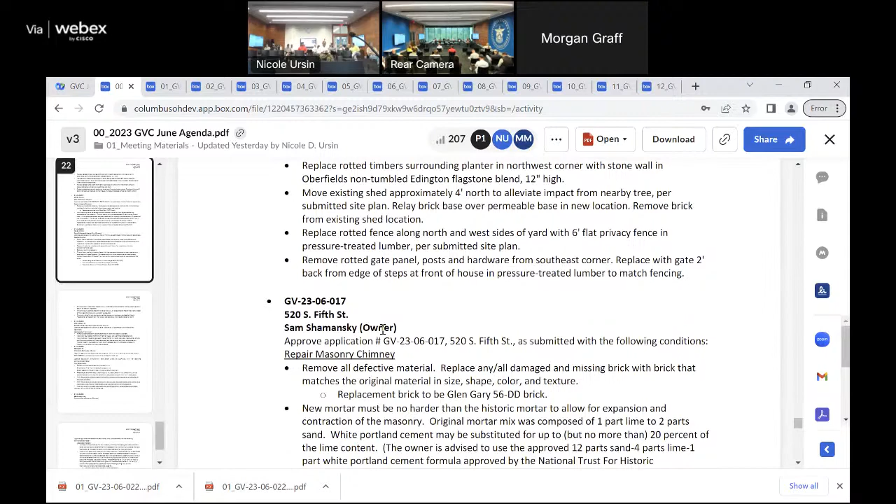It's GV 23-06003, 241 Alexander Alley. Thank you.

Mr. Chairman, if there are no other ones, I move to ratify the staff approvals. Second. Any questions on the motion? All those in favor? Aye. Against? Ayes have it, the motion passes.

Moving on to the approval of minutes from the previous meeting from May 3rd, 2023. Mr. Chairman, I move to approve the minutes. Second. Any questions on the motion? All those in favor? Aye. Against? Ayes have it, the motion passes.

Moving on to the applications for certificates of appropriateness. Item 1, GV-23-06-022, 311 Columbus Street.

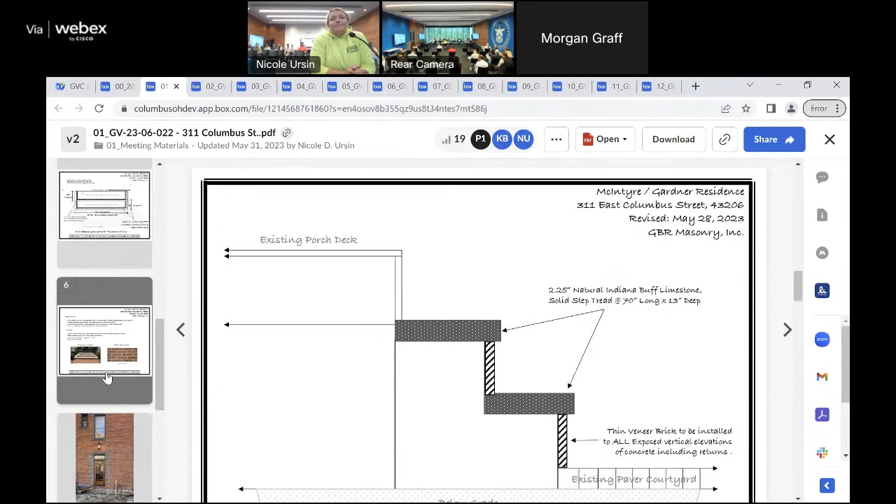So this is not typical construction for the village. It's either wood or limestone. Really, the case is all brick. This is a combination of a limestone tread, which is not full depth, it's 2 inches, 2 1/4 inches. And the fascia or the risers is all done in brick inset.

It's also in the rear yard. Yeah, I was gonna ask, is it rear? No, it's front yard. That's what I thought. The concrete's been in since the 50s. It's not level, it's not square, it's unsightly.

So my suggestion would be, since these are not original historic materials, you've got to replace them in kind. Replace it with appropriate wood construction, or appropriate limestone construction, with appropriate tread and riser ratio for code.

My company is in the habit of tearing out steps, excavating for steps, as you can see in other properties, and building them from full masonry. But I don't understand why I need to completely remove solid concrete. I'm just saying what you're proposing is a limestone tread with a riser, which is not German Village architecture.

There's an example of one I've done in the village, and I have multiple examples. Probably in the backyard. On Mohawk Street, 883 Mohawk is on there somewhere — sandstone risers, brick steps, backyard. That one's front yard. That one is the backyard.

I don't mean to get into it, but I have lots of photographs of the historic village. I'm just expressing my opinion about this application. There are multiple scenarios in the village of what I believe about this, and I'm saying there's lots of them.

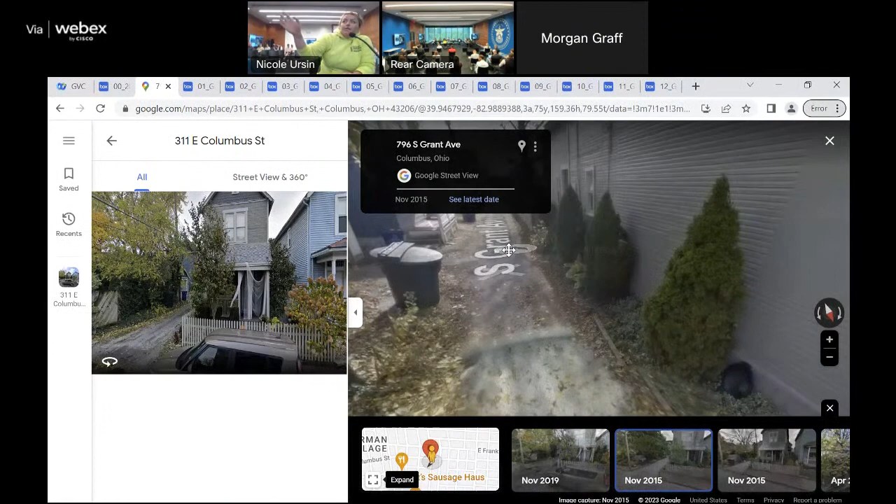But what if you just read number 4: if porch bases, steps, or stoops connect to a stone foundation, you need to maintain the stone foundation's color. As I mentioned, there isn't one, and it doesn't need a roof either. But there is a brick paver walkway, brick pavers in the courtyard, which are concrete. They plan to change to real brick in the next phase of this project.

So the running riser brick falls in suit with the replacement of those pavers in the future. It doesn't agree with the guideline though, that says the riser and the tread should be the same color. So you've got a dark brick. If you could reread number 5, I believe it said the brick shouldn't be a different color than the stone. 'Avoid brick as material for porch bases, steps, or stoops, because brick used in this way breaks the visual continuity of light colored stone foundation. Instead, use light colored stone or construct these features out of concrete with a color similar to that of the local stone.'

So there is no stone to match, so there's no reason that brick shouldn't be available. Well, that could also imply that the concrete is a substitute for stone, and having brick applied to the concrete then kind of wrecks the illusion of it being a substitute.

I remember approving at least one, if not two, of these previously. Have those been approved? That was my next question. Yeah, there was one on Sycamore that we didn't approve, for the big set, because they were doing the same thing. So pick your choice.

And I don't find it particularly actionable, I'm just trying to find guidance. Again, the reason for the brick risers is to match the brick courtyard, which will match the brick sidewalk, so in that regard, everything does flow and match. Except you've got a wood porch. Does the porch seem to be original? Yes.

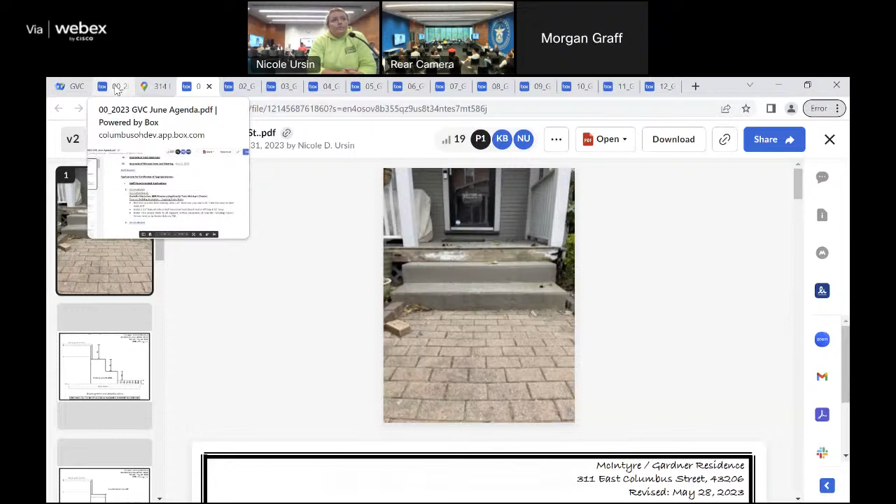I feel like the brick riser comes from nowhere if it were on a brick house. But you have a wood frame house, and I can see adding limestone steps if they're all limestone. I would rather see the riser and the tread be the same material. They said the concrete—I could deal better with it, it's just the concrete. By the time they cut that away, I think... if you scroll down, there's an exact replica of what will happen after this work is done, taking a little bit off the bottom step and a little bit more off the top step.

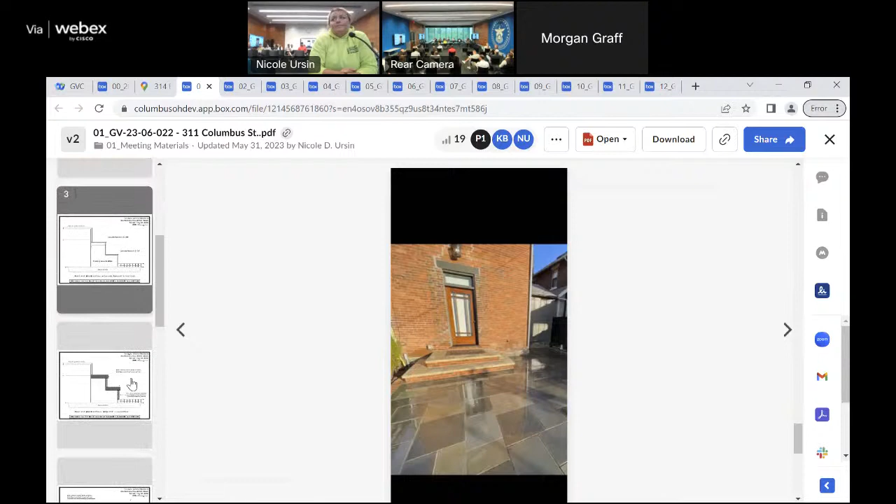I get all that, but the thing that strikes me as odd is the fact that there's brick on the riser, but no brick on the home. I get that you're going to put a brick sidewalk in, but still, if they choose to wrap that brick porch in block and put more brick there, that's up to them. Right now, this is the first step of making the front of their house look more appealing. To me, the only thing that's weird is the brick riser and then wood top steps. It's a lot of materials there.

We can vote and see where it falls, or we can take it back to the homeowner and decide what they want to do. It's up to you to ask us which.

This has always been their goal. I remodeled their kitchen, went through all the facets last year, and taking that remodel and moving it into the front of the house was always their anticipation. This has been going on for 4 months now, and with the cancellation of the last meeting, thank goodness I haven't ordered materials for this project that's been approved by my clients for the last 5 months. It doesn't make sense to me that a goal they've always had since they bought this property can be shut down when properties on their street are under construction without permits.

It's making me a little crazy to go through this 4-step process when a pool next door gets approved in the first go through staff approval, on a house under complete tear-out construction. There's never been a pool that's staff approved, that's not an element we staff. We're going on 4 months now. We do not staff approve pools, but we do staff approve steps if it's in-kind, or if it's the original fabric that was in place.

But if it's restoration, alteration, and change, I understand that's something different. It is an improvement in my opinion, and continuity of the materials will flow after the courtyard is done, after the curbs and railing are done, which still have to come in front of this commission. I already have the application submitted for that next step.

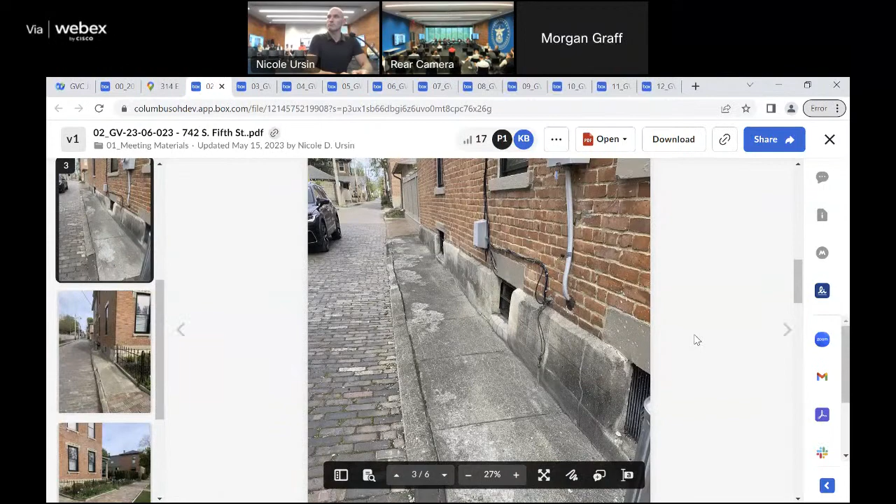Staff analysis: at the June business meeting, the commission requested information on where the applicant will source the brick, and the applicant responded that the bricks were salvaged from a home in Marietta, Ohio. The bricks have been salvaged and are on site at 742 South Fifth Street. Staff recommendation: staff recommends approval with any and all clarifications to be submitted to HPO staff for review and approval prior to the issuance of a certificate. The basis for that recommendation is 311613 standards for site improvements A, and the German Village guidelines for walks, sidewalks, driveways, patios, and parking lots 1.

Anything else to add? All right, questions, comments from the commission? Just a comment that I think these are actually Haydenville bricks, not Nelsonville bricks. I think the bullseyes were Haydenville. They're really cool, the technology was patented in Ohio, and these are all over the world. They're really cool, they're both Nelsonville, and they're all over the neighborhood too. Yeah, I made a little patio with this.

That's one question for the commission. Putting in, typically we use red brick pavers - this is more decorative, historic. That may not have been the original location where they're proposing it. If this is approved, is the case for approval the fact that we're matching elsewhere on the property, as opposed to putting in new, or is this something we approve across the board on any application?

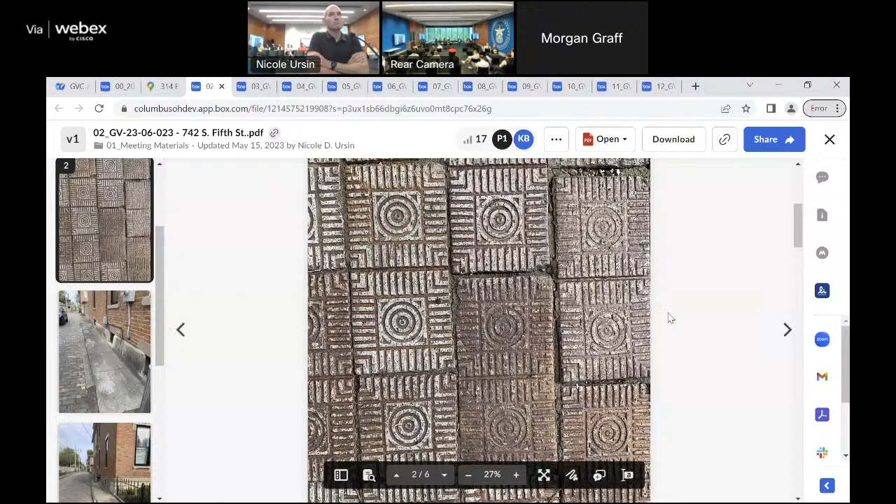I don't know about any application. I think it's applicable here because it's a continuation of what's already in front, and also the house across the street - there's two of those, and they were likely time appropriate as well. I just want to make sure we have justification, that's all.

Mr. Chairman, on item 2, GV 23-06-023, 742 South Fifth Street, I move to approve as submitted. Second. Any questions on the motion? All those in favor? Aye. Against? Ayes have it, the motion passes. Thank you very much.

Moving ahead to item number 3, GV-23-06-024, 243 East Livingston. Once you're settled, please raise your right hand. Do you swear to tell the truth, the whole truth, nothing but the truth? I do. Please state your name for the record.

Andrew Rhoda. This is a request for action of the variance recommendation, for 3356.03C4 permitted uses, to allow for residential use. Staff analysis: I added photos this morning so they're not on your Kindles, and I apologize for that - they're on the screen now. There was no COA on file for converting the structure from residential to commercial use, and the building is currently used as a commercial property.

At the June business meeting, the commission asked if a parking variance would be needed and if there were any other variances needed for the property. The applicant provided that there were 2 off-street parking spaces behind the building and no other variances would be needed. Staff recommends the commission recommend the application as submitted. The basis for staff recommendation is 311613 standards for site improvement A, and the German Village guidelines for zoning variances, page 139. Anything else to add?

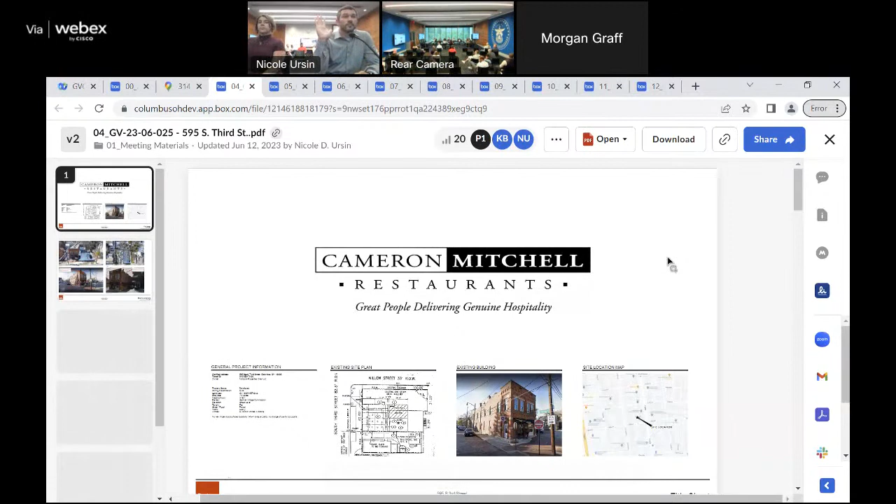Thank you. All right, moving ahead to item number 4, GV-23-06-025, 595 South Third Street. Once you're both settled, will you please raise your right hands. Do you swear to tell the truth, the whole truth, nothing but the truth? I do. Okay, please state your names. Valentine Catapano. Randy Roberti. Cameron Mitchell. Thank you, this is a request for action.

The proposed work description is an exterior building alteration for changes to approved design and light fixtures, to remove hanging lights from the tree. The lights were approved as GB 2210-10-26 because the new tree was approved as GV 23-04-017 cannot support proposed light fixtures. Also to relamp the existing light fixtures on the building and rewire existing exposed exterior conduit on the building interior through masonry joints, and the landscaping is revisions to planting beds on the patio and entry for submitted landscaping plan.

Staff analysis is that a tree was approved for removal following guidance from HPO as GV 23-04-008, and a new tree was approved as the replacement tree for GV 23-04-017. With the approval of GV 23-04-017, the applicant confirmed that no changes to design would occur. The applicant now shows removal of hanging lights due to the replacement tree. At the June business meeting, the commission asked the applicant what the light spread would be from the light fixtures being rewired and requested close-up photos of the light fixtures. The applicant provided new material showing photos of the lights and the proposed light spread.

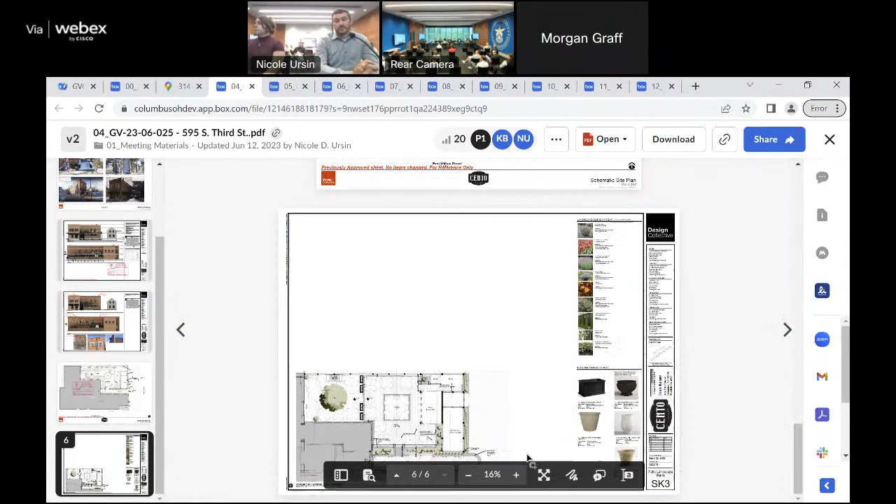Staff recommends approval with any and all clarifications to be submitted to HPO staff for review and approval prior to the issuance of the certificate, with the condition that the applicant confirms no new light fixtures are proposed for the building. The basis for the staff recommendation is 311613, standards for site improvements A, and the German Village Guidelines, exterior considerations for site lighting, street furniture, pools, fountains, and gazebos, 1, 2, and 3. Anything else to add? No. Questions, comments from the commission?

Got questions about the two light fixtures on the front of the building, east side, the existing ones. I cannot remember those ever being illuminated. Yeah, they no longer function. Yeah, so I can't remember what the pattern is, but you're doing 25 degrees.

Strictly aesthetics with you guys on this? Yeah, 100%. That's my only concern. The goal is just to accent the facade. That's what I figured, but I think a 25-degree spread's gonna hit the curb and go out. So yeah, exactly, if you can knock it down and wash the front of the building with it, that would be what I would recommend.

Any other questions or comments? But just for clarity, we're willing to amend the application as suggested. So what, just angle it down a little bit more? Head towards the building, it should... however, clarify how we'll put on the record that it's washing the building at the top of the awnings and minimizing any impact on the sidewalk. Goal is to wash the building, not to wash the sidewalk.

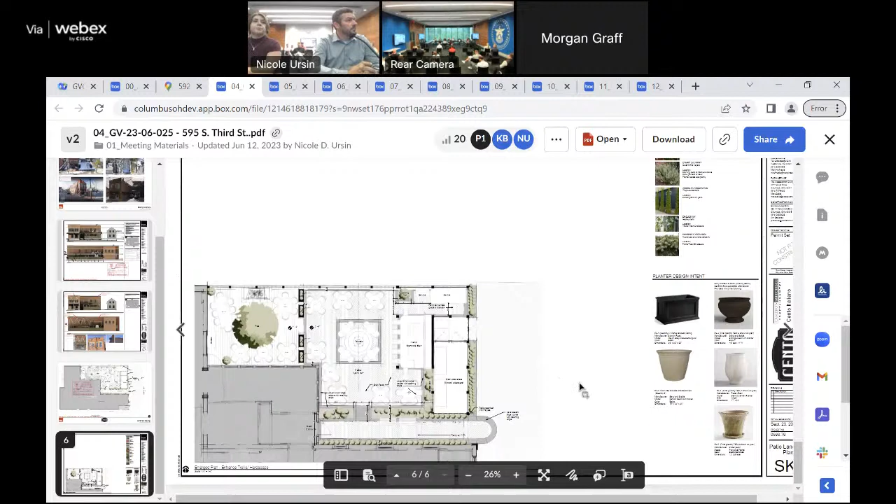Same side there, the entry alley, if you will. Thank you, yeah, same location as previous. We just made a very minor tweak so they won't sit on the curb, they'll sit on the pavers — is that right, Eric? Correct, sunk into the pavers.

Good. Is there a motion? Mr. Chairman, on item 04, GV 2306-25, 595 South Third Street: move to approve as amended by the applicant, that the light fixtures on the east elevation will be strictly wall wash at the top of the awnings by cranking down and shrouding the existing fixtures.

Is there a second? Second. Any question on the motion? All those in favor? Against? Ayes have it, motion passes. Thank you. Thank you. Thank you.

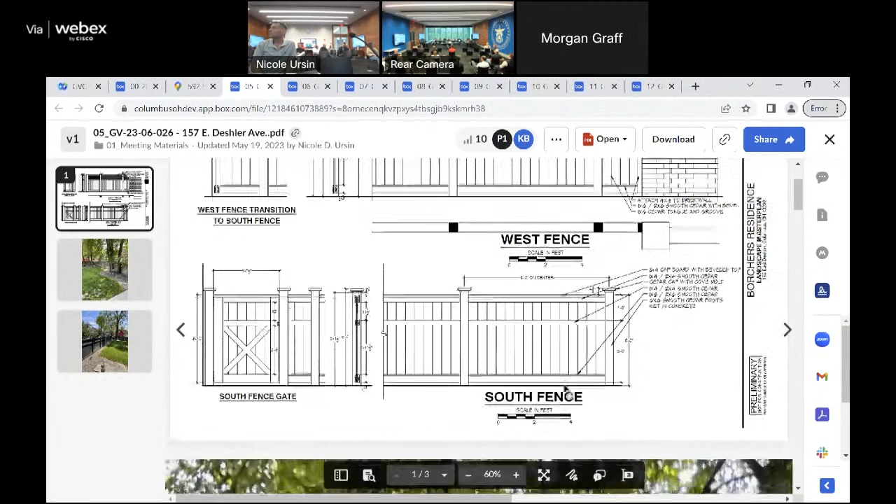Mr. Chairman, on item 05 GV 23-06-026, 157 East Deshler Avenue, I move to approve as submitted with the amendment that the fence will be painted and color samples, whatever, will be submitted to HPO.

Second. Any questions on the motion? All those in favor? Against? Ayes have it, the motion passes. Thank you. Thank you.

Moving on to item number 6, GV-23-06-027, 835 City Park.

If you please raise your right hand. Do you swear to tell the truth, the whole truth, and nothing but the truth? Yes. Please state your name for the record. Jan Park. Thank you. This is a request for action.

It's for landscaping to remove a tree, an existing dying spruce tree from the backyard, and to plant a new slender Hinoki cypress tree on the north side of the property.

The staff analysis is at the June business meeting. The commission asked what type of spruce would be planted, and for the applicant to provide a landscape sketch showing the existing and proposed tree locations.

The commission asked how the tree will impact the house. The applicant responded that they would rather plant a tree on the north side of the property rather than the south, as the south side is very close to the neighbor's house.

The area is identified in a photo in the materials packet. The location is away from the north neighbor's house, and the applicant provided they would prefer to plant a slender Hinoki cypress tree rather than a spruce tree. It is a narrow, upright growing evergreen. It will grow in a pyramidal shape with open branches for a textured look.

It grows to a mature height of around 8 to 12 feet and a width of 4 to 5 feet.

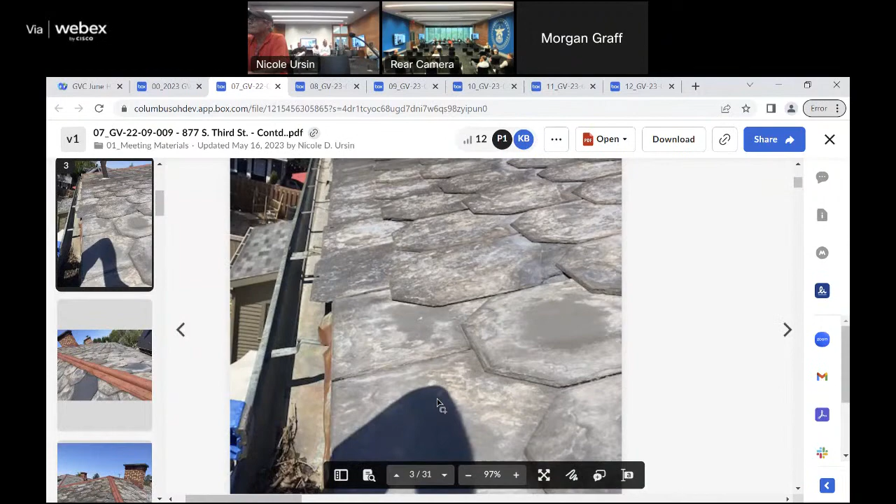The proposed work description is for exterior alterations proposing to replace the existing ribbon slate roof with an approved shingle, the GAF slate line English gray, to install metal ridge roll in either Tinner's red or gray. The roof has had past repairs as stated by the applicant. The slate assessment has been provided, and a second assessment has now been provided this year to be placed on this agenda.

The following is from the approved September 2022 GVC hearing minutes. Commissioner comments: Commissioner Thiel stated that the report submitted indicates that the underlayment is the cause of the leaking roof, but stated that the underlayment would not be justification for a full slate removal since it is an existing condition. Commissioners asked the applicant to clarify if the condition assessment was from a separate company, and the applicant verified that he is not a part of the company that did the assessment.

Commissioners agreed that they did not have enough documentation and would need additional documentation to finalize their review, to see additional evidence of where the water is coming from. Commissioner Harkey asked the applicant if there was access to the attic, and the applicant stated there was a panel in the ceiling to access it. Commissioner Harkey recommended the applicant explore the attic to see if there's evidence of damage or where the water may be coming through, and to know how it relates to the areas.

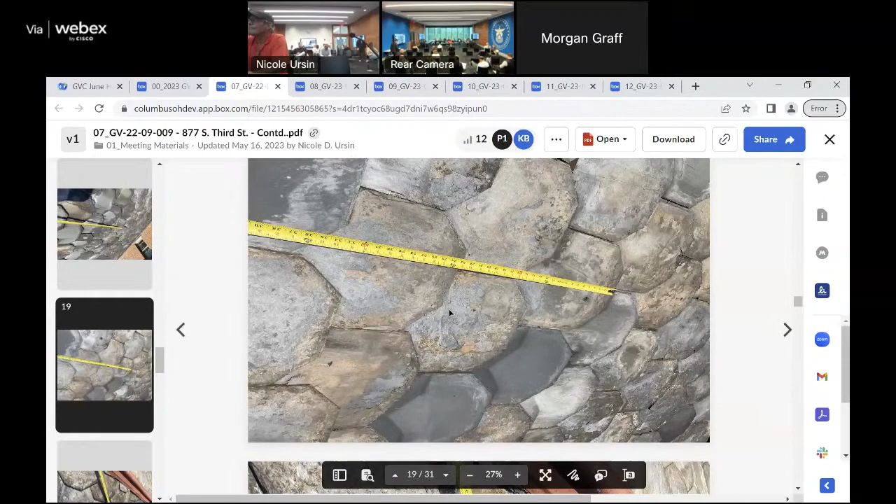Commissioners asked to clarify the asphalt shingle selection. The applicant responded stating that they would be selecting GAF slate line English gray slate in lieu of the antique slate, and that they will be choosing the English gray slate if approved. Commissioner Durst asked if the chimney flashing had been updated and if the flashing was embedded in the mortar. The applicant stated that yes, the flashing had been updated and was installed via mortar joints, and the chimney has been sealed and maintained.

Commissioners recommended obtaining an additional assessment from another slate company.

At the June 2023 business meeting, the commission asked if the underlayment would be installed and if that would impact the profile of the roof, and emphasized that a metal roof ridge roll would be required. The applicant responded saying they intended to replace ice guard on all eaves and synthetic felt on the rest of the roof, and said that it would not impact the profile of the roof. They have always intended to put back metal ridge roll on the opposite ridges.

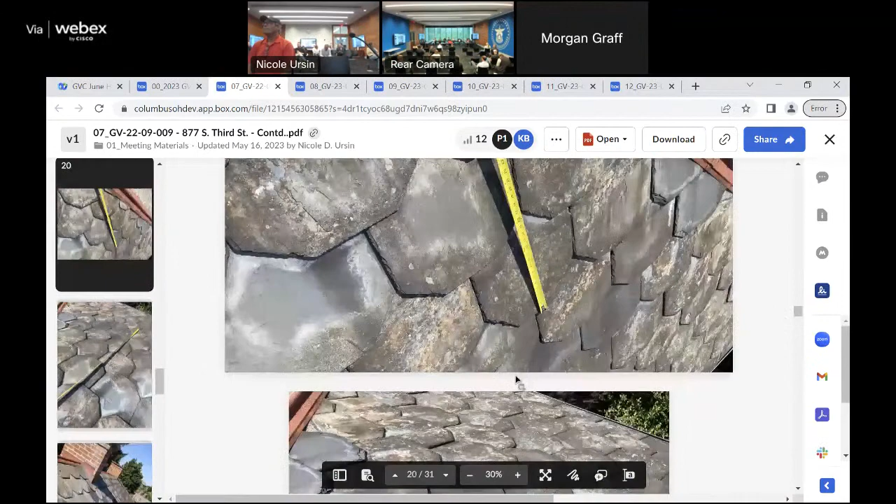The staff recommendation is that the commission offer feedback and continue the application to further evaluate the condition of the existing slate. The basis for the recommendation is 3116.11, standards for alteration 6.5 and 11, and the German Village guidelines, the 2005 amendments for slate roof replacements, page 175.

Anything else to add? No, not at this time. Questions, comments from the commission?

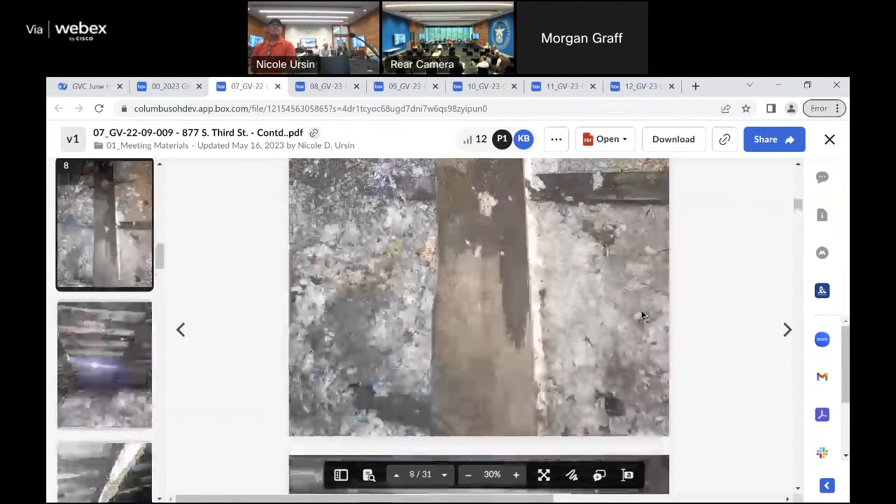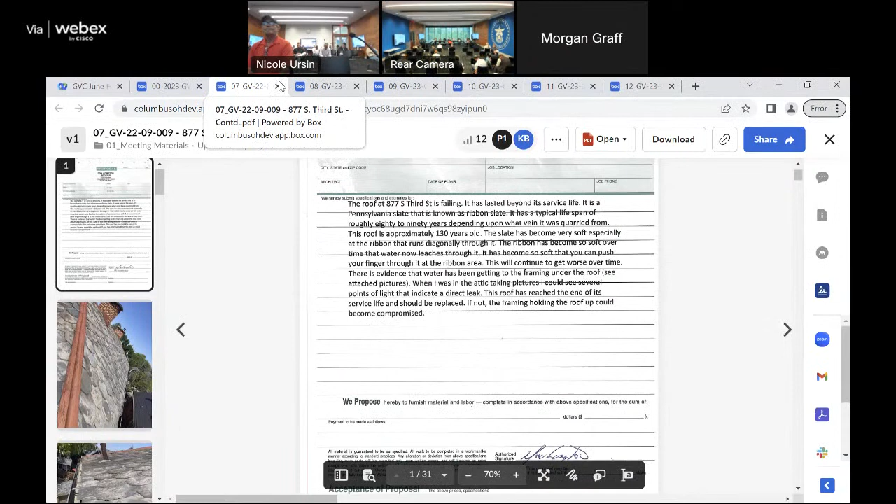Good, there's no questions or comments, is there a motion? We're on a roll, 07 GV 2209009, 877 South Third Street. I move to approve the certificate. Second. Any questions on the motion? All those in favor? Aye. Against? Ayes have it, motion passes. Thank you. Thank you.

Moving on to item number 8, GV-23-05-028, which is 30 Columbus Street, 40 Columbus Street, and 762 Pearl Street.

Once you're all settled, if you would raise your right hand. You swear to tell the truth, the whole truth, nothing but the truth? Yes. Please state your name for the record. Kevin Parzak, Gunzelman Architecture + Interiors. Thank you very much.

This is a request for action. The proposed work description includes a lot combination and exterior building alteration. The lot combination is to combine 3 adjacent parcels, 30 and 40 Columbus and 762 Pearl Street, zoned R2F residential district. The proposed use is 3 residential units. There's also a variance recommendation involved: 3332.14 R2F residential district, permit 1 building with 3 dwelling units on the parcel.

3332.18, basis of computing area, to increase the lot coverage from 50 to 58%. 3332.19, fronting, to permit 3 dwelling units on 1 parcel without street frontage. 3332.26, minimum side yard required, to reduce the north side yard from 5 feet to 1 foot and the east side yard from 5 feet to 1 foot. And 3332.27, rear yard, to reduce the rear yard from 25% of the lot area behind each building to an existing rear yard of 0% as depicted on the site plan.

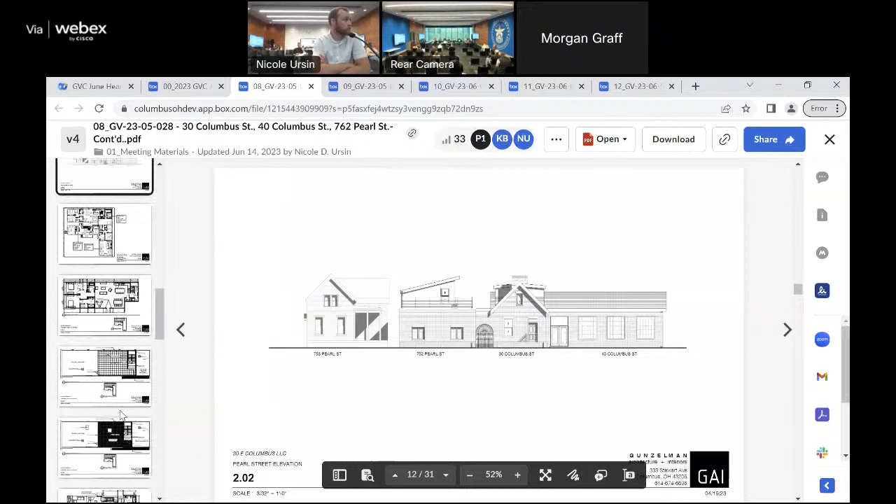For 40 Columbus, they'll repair and refinish existing metal windows, and install a new door on the west elevation. The door to be an aluminum clad wood double door with transom above to match the adjacent masonry openings, and the openings were bricked-in windows.

And on 762 Pearl Street, to install a new stair access to a new rooftop deck. Install a 6-foot tall privacy wall around the roof deck patio on the north elevation of the rooftop patio. Patio material to be a spire, interlocking paver, pedestrian grade. Install a 3-foot 6-inch railing with top rail above patio pavers on the north and west sides of the rooftop patio. Windows from the approved list and full light aluminum clad wood door to be installed at the rooftop access penthouse. The shingles will be from the approved shingle list, and the siding to be horizontal fiber cement siding.

Also at 762 Pearl Street, install new windows on each side of the existing door on the south facade, and the windows to be from the approved window list.

Staff analysis: the following is taken from the now approved May 3rd, 2023 GVC minutes. Commissioner comments: the commission commented that because staff has found the windows to be in repairable condition, the commission would encourage repairing the windows and might not support replacement. More documentation would be required for replacement to be considered.

The commissioners questioned the decision for a door rather than a window on 40 East Columbus Street and discussed the evidence of an opening at that location. A window seems to be a more appropriate choice for that opening. There is evidence of a fourth opening having existed or having been planned. The commission suggested bringing back the original masonry opening, and a window or door that matches the size of the masonry opening would be appropriate for that location.

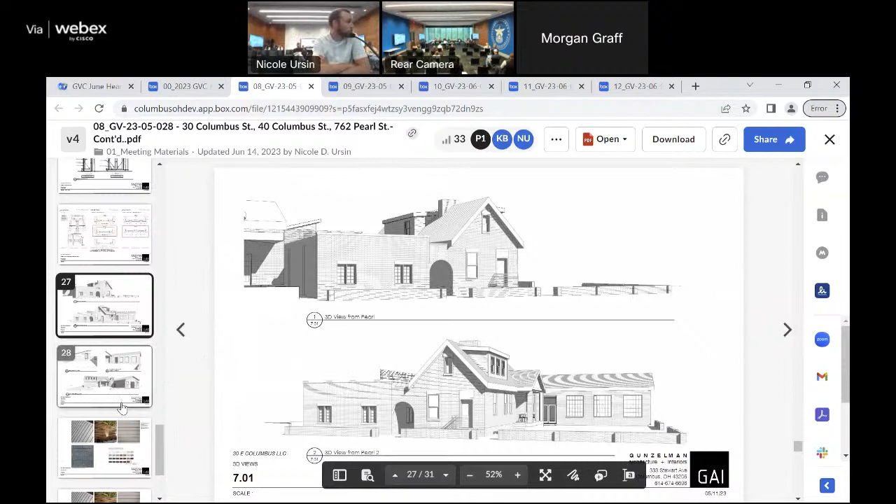Staff has provided Sanborn maps showing the location in 1891, 1921, and 1961. The buildings at 30 East and 40 East Columbus appear to have been built prior to 1921, and the building at 762 Pearl Street was constructed prior to 1961.

At the June business meeting, the commission asked for manufacturer information for the fiber cement siding, asked for the height of the fence at the south and southeast corner, and told the applicant to be prepared to discuss the style of door for the proposed double door. The applicant provided some siding information and a new sketch of the Pearl Street roof that states the height of the walls and fence on all sides.

The staff recommendation is approval, with any and all clarifications to be submitted to HPO staff for review and approval prior to the issuance of certificate. The basis for staff recommendation is 3116.11 standards for alteration 1, 2, 3, 4, 5, 9, and 10.

3116.13 standards for site improvements A. German Village guidelines for windows 1. German Village guidelines dormers and skylights 2 and 3. German Village guidelines for massing, roof shapes elements 6. And German Village guidelines for massing, rhythm of building openings, page 107.

Anything else to add? Happy to discuss the double door and transom at 40 Columbus.

The intent with the style of door and the transom, without any divided lights, was to differentiate the door and transom from the existing factory windows. Since the bricked-in opening had been there for some time, we wanted to not create a false sense of history with new materials. That's why we are not proposing any divided lights glazing.

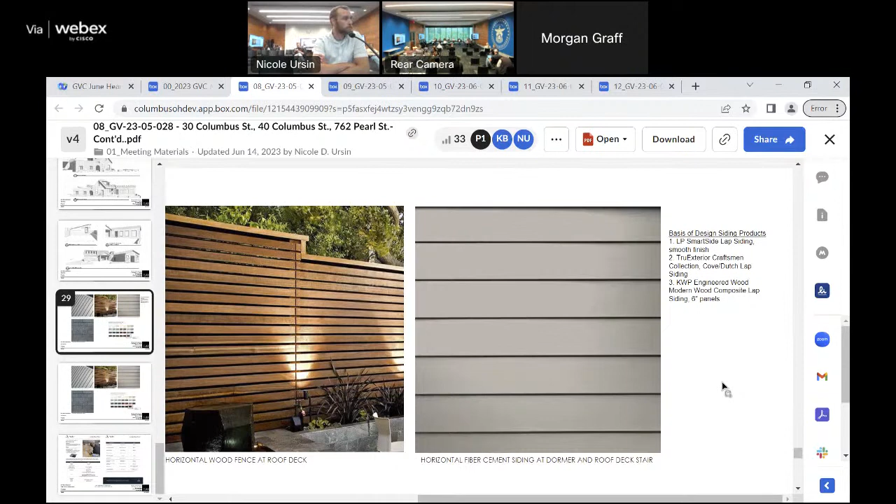The extent of this LP SmartSide is going to be on the dormer, and then on the roof assuming this. Correct.

I think it's a good option for a test case, as it's going to be a small area - not a major impact to the entire structure. The doghouse is so far back, it's hard to see. And if it fails, it's not a catastrophe.

Love working with that. Motion? Question before making a motion - do we just split these into two, one for the recommended variances and then one for everything else? Staff would recommend that split. So we can have a motion to split, and then we'll do a motion separately for each.

Everybody's good with the door as proposed? I actually think the logic makes sense to me. Yeah.

I would like to see the divided lights, but I get the approach. One for the variance - was that originally a door opening or was that originally a window? We couldn't determine. I'd be fine if they wanted a divided light transom, because it's a different type of door. So I'm okay with it, honestly. Aesthetic, whatever they like. I love a motion. All right.

On item 08 GV, 2305-028, 30 Columbus Street, 762 Pearl Street, etc. I move to split it into two parts, part A being the zoning variances and part B being the remainder of the application. Is there a second? Second. Any questions on the motion? All those in favor? Aye. Against? Ayes have it, motion passes.

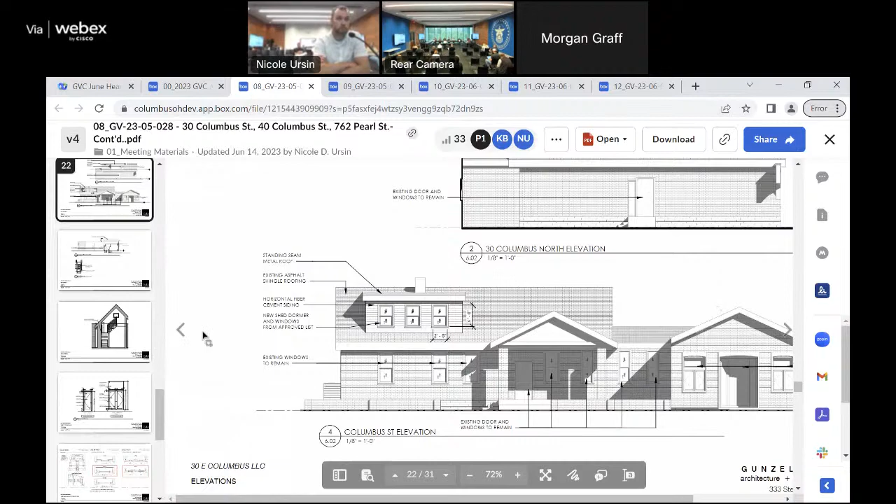And also make a note on the application, on the motion, that the double doors going in and opening, it's historically been there, but it's bricked up. We're not cutting a new opening into a pristine wall. All right, we have a second, no questions. All those in favor? Against? Ayes have it, motion passes.

Thank you very much. Thank you. Moving on to item number 9. There we go.

GV-23-05-030, 76 East Kossuth, and 804 City Park. Raise your right hand - do you swear to tell the truth, the whole truth, nothing but the truth? Yes, I do. Please state your name for the record. Nathan Sampson. Thank you. This is a request for action.

The proposed work description is a variance recommendation for 76 Kossuth Street. Code 3332.21, front yard setback, to reduce the required front yard setback to 6 feet from 10 feet, or 6 inches from 10 feet. Code 3332.26, minimum side yard east, to reduce the minimum side yard setback to 0 feet from 5 feet.

Code 3312.49, off-street parking spaces, to reduce the required parking spaces per dwelling unit to 1 from the required 2. And hardscaping to install a new in-ground pool that's 14 feet by 20 feet with an automated pool cover and the pool decking to be concrete without wash. To install a 4-foot tall fence and gate between 804 City Park Avenue garage addition and 76 Kossuth Street. And the landscaping plan is to be submitted.

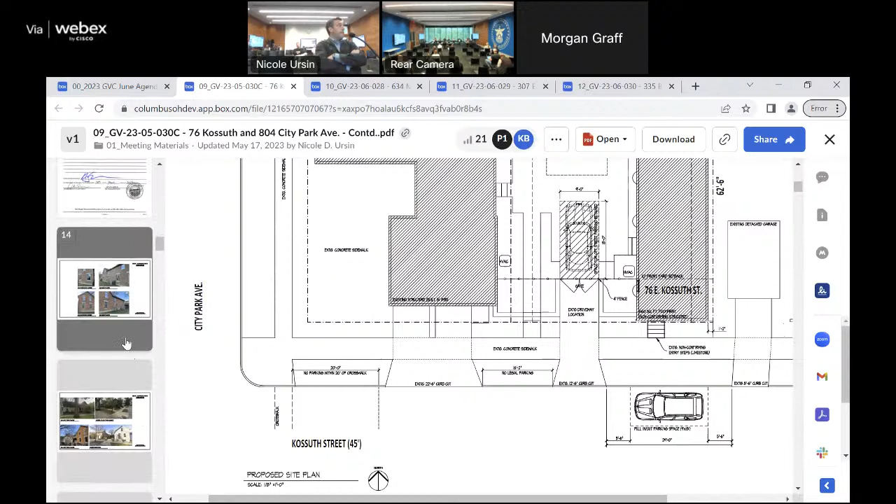The staff analysis, including summary of any previous review: at the March 2022 hearing, the commission voted to approve no door openings at the 804 City Park Avenue addition. The commission supported the design but conditioned that the AC unit be moved from the rear corner of the yard of the garage. The COA has not been issued, pending the receipt of the revised drawing showing the new AC unit's location, but that was changed. The AC unit's location was changed at the last approval in May.

At the May hearing, the commission... I'm missing words, I was trying to figure out what the word should be. But the commission also requested a drawing of the proposed retaining wall and details on the materials for the wall and steps. The commission also requested a drawing indicating where the paint will be for 804 City Park Avenue and emphasized the commission typically does not support painting previously unpainted masonry. The applicant provided updated materials, including removing the painting of the masonry.

The staff recommendation is that staff recommends the commission split the application into 2 parts - split it again, I know - the variance recommendation and the hardscaping.

Staff recommends the commission recommend the variance, and then staff recommends the application continue the hardscaping to allow time to provide the landscaping plan and hardscaping plan so the application can be considered together. The landscaping plan is on the July agenda.

The basis for the staff recommendation is 3-11-6-11 standards for alteration, 1, 2, 3, 4, 5, 9, 10, 11, and 12; standards for site improvements A; German Village guidelines for color 3; German Village guidelines for fences and walls 2, 3, 4, 5, 6, 7, and 8; and the German Village guidelines for site lighting, site furniture, pools, fountains, and gazebos 1, 2, 3, 5, and 6.

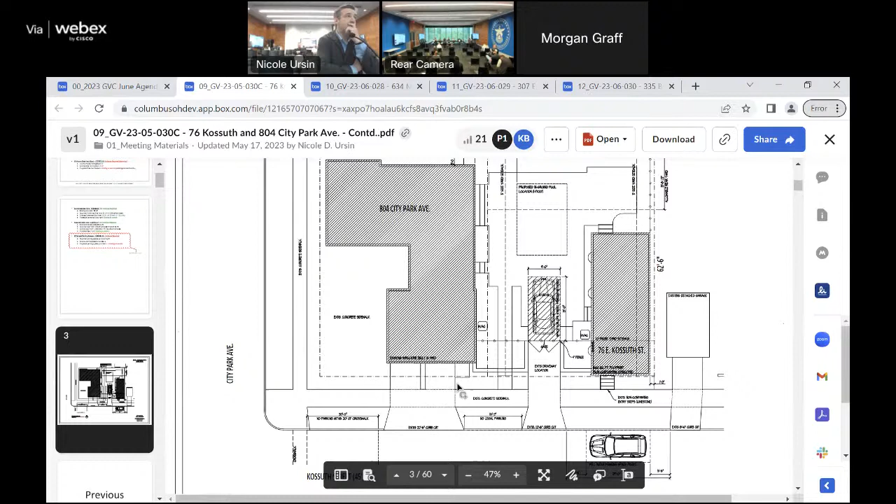Clarify that all of the requests are existing conditions, just firming up right now. Correct, and I think the one we updated per staff's request was the east setback. The existing condition is 14 inches, not 0, and we're happy to have that be a modification. So that's what we're amending right now.

Any questions? So we want to split this into A and B again, A being zoning, B being hardscaping. Yes, I think B can be contingent—you'll have the landscape plan, fence, etc., in front of you at the next hearing, so you could address the second half at that table.

So would it be better for us to just say we're going to amend your application to be just zoning and eliminate the rest of it? I think that's simpler. The only reason is it's on the agenda next month as a continued application, and this would be for the 30C, and there'd be no way to put it on the agenda, so my request is to add it to that application.

My request is to have a motion to split this, the variance being delta. We haven't used delta yet, have we? I talked to the historic preservation officer and he suggested lowercase letters, so C-a and C-b. Okay, if you were to split the application that way, C— yeah, thanks, just to keep the history of the review fair.

Okay, so on item 09 GV 23-05-030C, I move—sure you don't want to do C.1 and C.2? That's okay. All right, I move to split it into two parts: C little a being for the variances, and C little b being for the remainder of the application. Any questions on that motion?

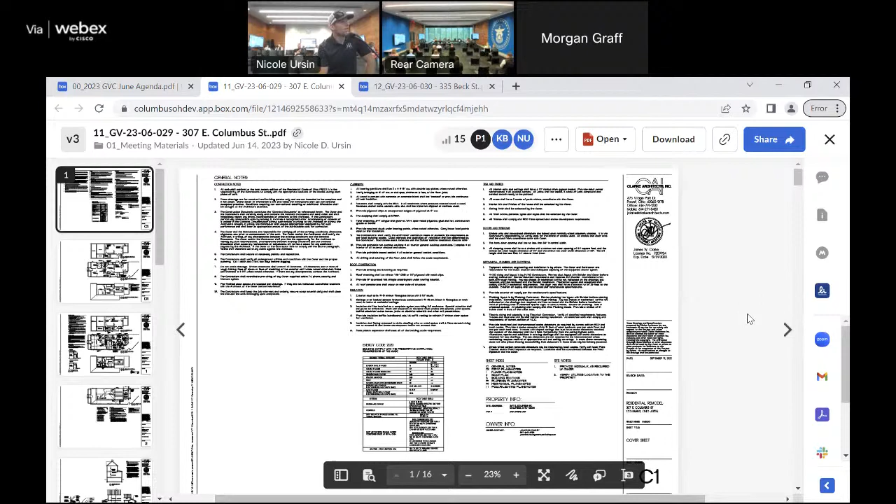You'll please raise your right hand. You swear to tell the truth, the whole truth, nothing but the truth? Yes. Please state your name for the record. Charlie Shire. Thank you very much.

This is a request for action. The proposed work description is an exterior building alteration to enclose 3 windows and 1 door. This application is in response to a code violation, violation number 23444000002. The work has been completed. We enclosed 3 windows: one on the east elevation first floor, one on the east elevation second floor, and one on the west elevation third floor, and enclosed 1 door on the east elevation at the front.

The staff analysis, including a summary of any previous review, is at the June business meeting. The commission requested an elevation drawing showing the existing condition before work, requested Sanborn maps, and requested any photos of construction showing the exposed wood or lumber.

HPO staff would recommend retaining windows and doors, drywalling over the interior to maintain the original historical openings typically. Staff recommends continuing the application to allow time for the applicant to create a design that better aligns with guidelines and code.

The basis for staff recommendation is 3116.11, standards for alteration 1, 2, 4, 5, 6, 9, 10, 11, and 12; German Village guidelines for windows 1, 2, 3, and 6; and German Village guidelines for entrances and doors 1 and 7. Questions or comments from the commission?

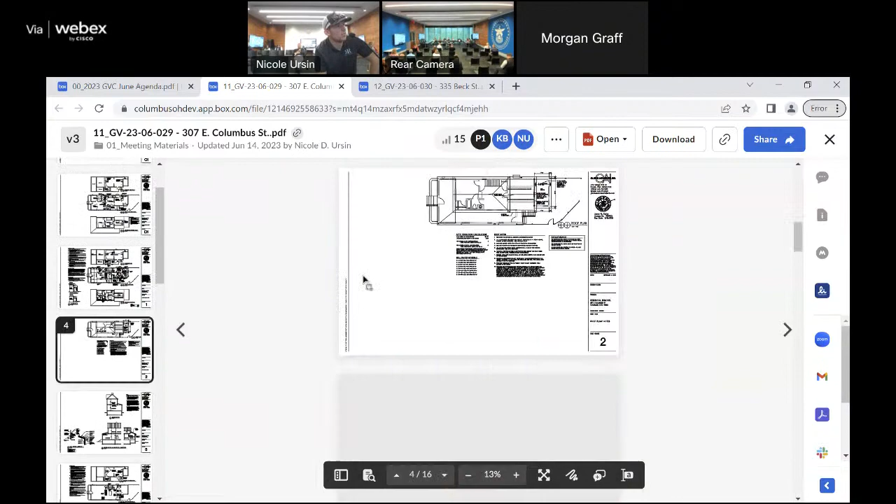Can I say a comment? Yes. I'm the general contractor on the job, but this got approved by the city, the plans did, and then the owner had me move forward on it. I wasn't part of the planning. But the plan got approved by the city. We were allowed to do the work, and by the time we removed those windows, which were in really bad condition, they were already gone and we had already framed up the exterior.

So it didn't get through the... Yeah, I don't know what the confusion was, but I don't know why the plans got approved and you guys didn't get to see it. It did go through the city and get a permit. We were notified that there was work being done without approval from COA. Eventually there was a discussion with you, Charlie, and the homeowner to get this solved.

A lot of the items were repair, replace in kind. I believe I was staffing at the time of this discussion. There was a discussion about the enclosed windows and doors, but that would need to come to the commission, and it seems to have been completed without that discussion. We're having that discussion now. A lot of the items were approved by staff for repair, replace in kind, and typically that wouldn't happen.

It should get sent to you to look at. Yeah, typically that's the process. Something fell through here. You are correct, Commissioner Foley. That's interesting, that's tricky. So if you're making this application and asking to remove these windows before it was done, we probably wouldn't approve it.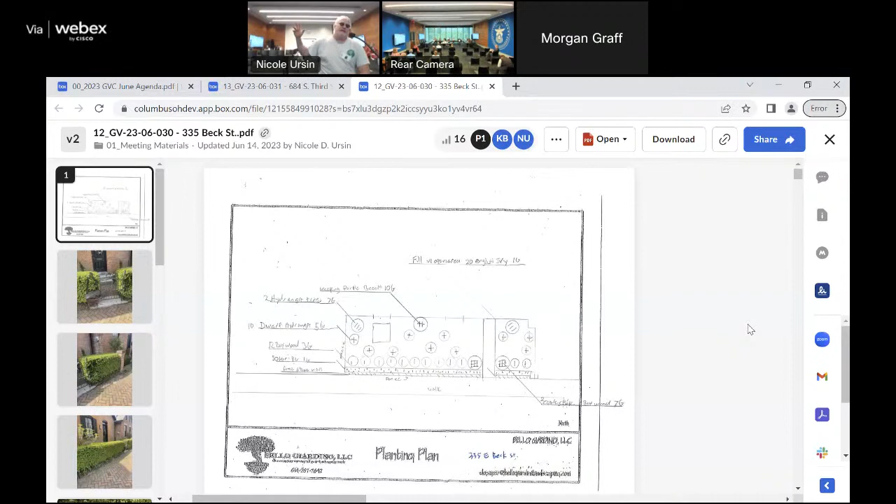Thank you. This is a request for action with proposed work for landscaping: to build a 6-inch tall wall along the fence using 1.5 tons of Indiana limestone and a gravel base glued together, the removal of all plantings in the front yard, and to plant boxwood, dwarf hydrangea tree, weeping beech, cone-shaped boxwood, and English ivy per the submitted site plan, and to grind off paint and repaint the metal fence.

For the staff analysis: at the June business meeting, the commission asked if the applicant intended to replace the existing brick edging, requested a sketch of how the wall interacts with the fence, and advised against grinding or damaging the fence, recommending a wire brush to remove paint instead. The applicant confirmed they are replacing the brick and provided a photo showing what the wall will look like when complete. Staff recommends approval, with any and all verifications submitted to HPO staff for review and approval prior to issuance of the certificate.

The basis for that recommendation is 3116.13, Standards for Site Improvements A, and the German Village Guidelines for Fences and Walls, sections 1 and 2.

Anything else to add? Questions or comments from the commission? I'm curious about the relationship between the bottom of the fence and the top of the limestone — does the limestone sit right underneath the fence or in front of it? Because in your example, it looks like it's in front of the fence. It's similar to that, so it's in front of the fence or the property line. And where's the brick at? The brick is gone. Where was the brick — was it under the fence or in front of the fence? Looks like it's under the fence.

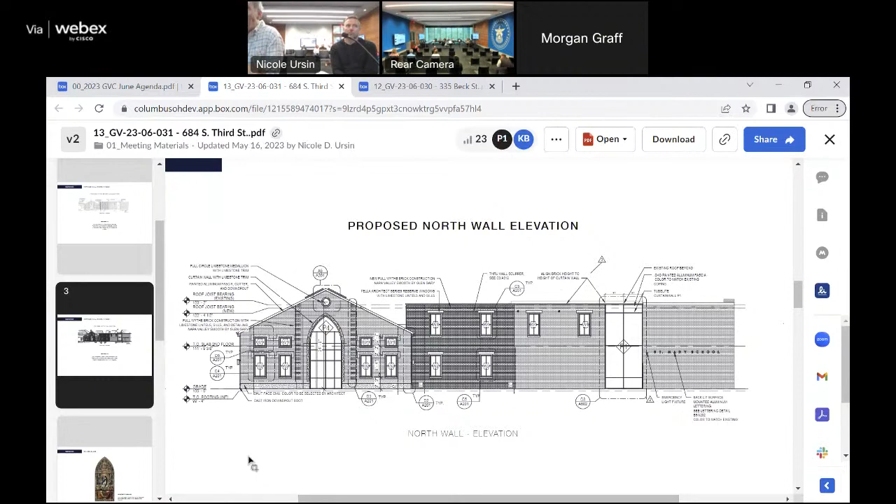Switching gears to our projects, first specific to our window request. Understand at the time of our project submission, we had not sourced a stained glass window befitting of the space. The window found was sourced from a closed parish in Pennsylvania. In order for the specific window to be installed, the Gothic arch modification is necessary.

Secondly, regarding the ramp, the inception of this need was born out of feedback received during the listening session Father Vince held with the South Side parishes involved in the consolidation going on right now with St. Mary. It was learned that even though we have an ADA rated entrance through the Burkley Center with an elevator, many, though not handicapped, are physically challenged to climb the front steps on 3rd Street on a regular basis to enter the parish. Rather than alter the 3rd Street entrance process, we chose this alternative to provide assistance to folks accessing from the rear, being able to walk up a ramp without any steps to aid their access to the church from the back.

With that, I'll turn it over to Matthew for additional commentary on the project. I think Kevin did a great job explaining it, so I'm here to answer any questions you might have, specifically with stained glass for this application, and then we can talk more about the ramps.

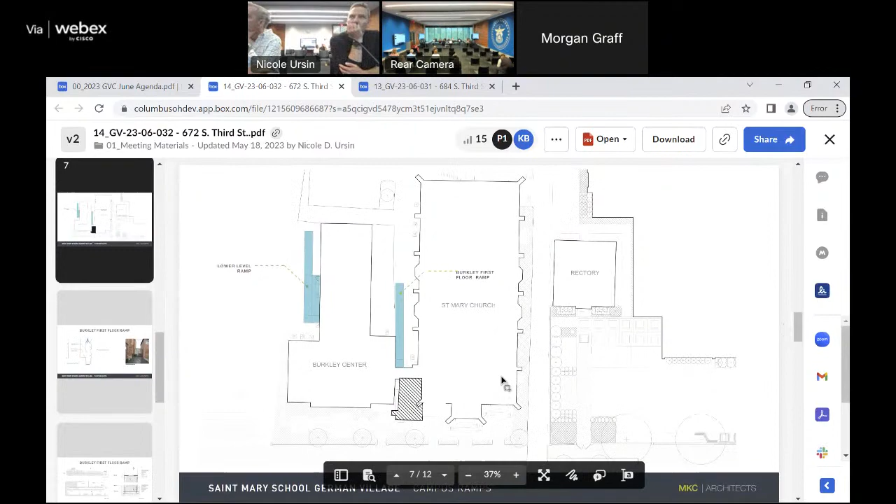The proposed work description is for new construction and exterior building alteration for accessible ramps, to install a rear church ramp, to demolish existing concrete steps, with the existing concrete landing to remain. The new concrete ramp is to be built 65 feet in length, 5 feet in width, and approximately 6 feet tall, with a steel guardrail with profile to match existing guardrail on St. Mary's campus, painted Sherwin-Williams 7069 iron ore or black powder coated. To install a lower level ramp, the removal of earth down to the lower level with the installation of 2 concrete retaining walls, and a new concrete ramp to be built. To install a new guardrail with profile to match existing guardrail on St. Mary's campus, also painted Sherwin-Williams SW 7069 iron ore or black powder coated. To install a new entry door into the lower level of the Burkley Center, a Steelcraft hollow metal door L series.

At the staff analysis at the June business meeting, the commission had no comments or feedback for the applicant at that time. Staff recommends approval, with any clarifications to be submitted to HPO staff for review and approval prior to creation of the certificate. The basis for staff recommendation is 3116 standards for alteration 1, 2, 9, 10, 11, and 12, and the German Village guidelines on accessibility 1, 2, 3, 4, 5, 6, 7, and 8.

Anything else to add on the ramp? Questions, comments from the commission? Mr. Chairman, if there's no comments on item 14, GV 23-6032, 672 South Third Street, with respect to ADA access, I move to approve as submitted. Second. Questions on the motion? All those in favor? Aye. Against? Ayes have it, the motion passes. Thank you very much. Appreciate it.

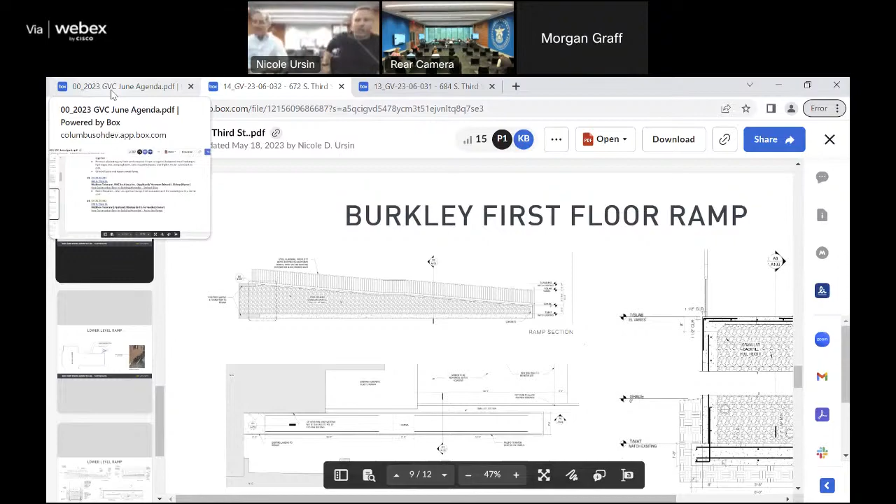Moving on to item 15, GV-23-06-033, 738-744 Yeager Street. The applicants for 738-744 Yeager Street. Come back to that one. Moving ahead to item 16, GV-23-06-034, 107 Deshler.

If you both please raise your right hands. You swear to tell the truth, the whole truth, and nothing but the truth. Yes. Yes. Please state your names for the record.

Steve Herb with Urban Order Architecture. Dean Berlin, Urban Order.

This is a request for action. It's an exterior building alteration for shutters, to install painted wood shutters over existing openings on 4 east elevation second floor windows. 2 windows in the west elevation will remain shuttered as previously approved.

GV-22-06-026: in 2022, the commission approved 5 windows to be shuttered, and at the June business meeting, the commission had no comments or feedback for the applicant at that time.

The staff recommendation is that staff recommends approval with any clarifications submitted to HPO staff prior to issuance of certificate. The basis for staff recommendation is 3116.11, standards for alteration 1, 2, 9, 11, and 12, and German Village Guidelines for ornamentation, trim, brackets, shutters and light fixtures 3, and German Village Guidelines for windows 6.

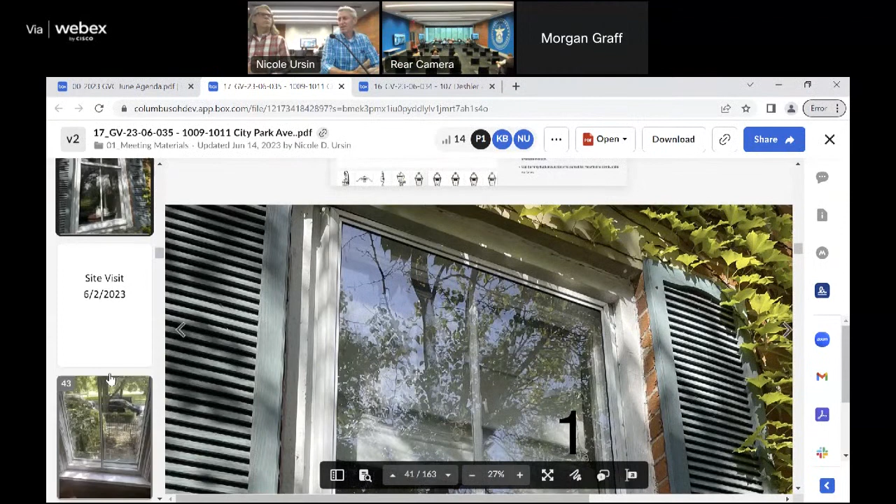Anything else to add? I think with everything with the windows, if we can just do that and be done with that, that would be great. As far as windows, this is something that is continuously coming up with clients.

And if we need to, what would the commission be interested in seeing that would compel them to say that it's okay to replace an old wood window? Or is there anything? We see, and our clients see, that windows have been replaced, and I know that sometimes they were replacing a replacement window, or there's deterioration more significant than these windows.

But at the same time, repairing an existing wood window has been difficult to find someone to do. And storm windows, we have only one company that's making a storm window anymore.

It's more than just trying to fix a historic window, because we understand that would be the preference. But what would compel the commission to come up with an approval to put a new window in?

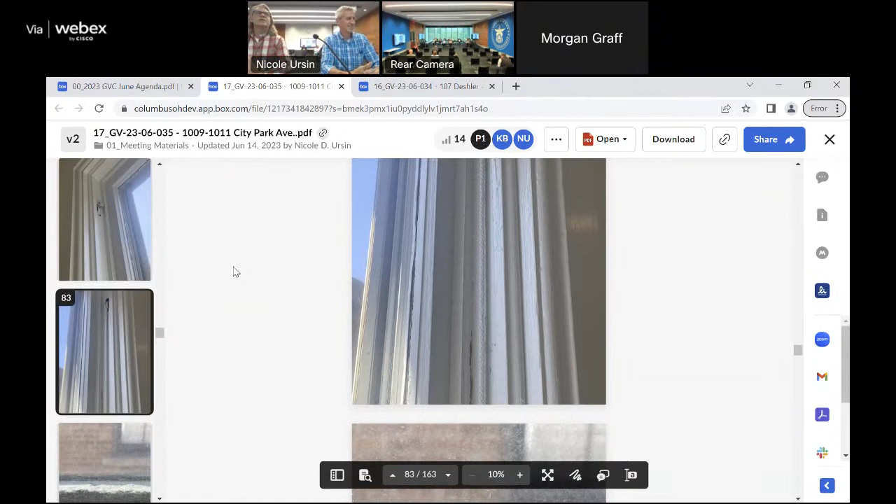We were here a month or two ago for a project in Mohawk, and we are fixing all of those windows, so we know the people who can fix them. It's just that we're 18 months out on lead times to get the rest of the project finished.

Is there anything to talk about removing the awnings and replacing the replacement door and taking the shutters? I have nothing to add on those topics.

As far as the new gas lantern replacing the existing electric fixture, we're going back and looking through pages trying to find the size of the existing fixture versus the proposed fixture. I didn't measure the existing fixture. Existing looks like it's about 12, 14 inches — 4 bricks, yeah, 4 bricks, 8 bricks — and then the size of the new one is smaller.

So you're doing a 10-inch? Yes. I can't see that — top to bottom, the existing one looks like 15 inches. Can you scoot? Those exterior fixtures could just be really big, I think is the concern. This one looks in scale to what he says — it's very similar to what exists.

There's often conversation about folks wanting a larger gas lamp because they want more light output. It's the same trade-off — if you want a compatible fixture, there's a reason gas fixtures weren't put in these locations in the first place; they weren't meant to provide broad daylighting of the space. This one says it's 10 to 16 inches tall, and your existing fixture looks like 15 inches tall. So I'd say probably the 15-inch one would be appropriate.

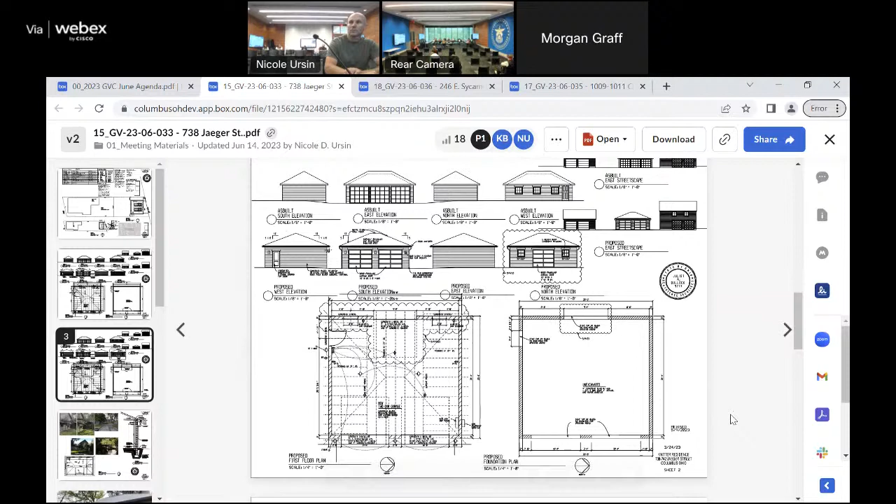Staff analysis, including summary of any previous review: in 2020, with GV-20-07-044, the commission approved the demolition of the garage due to a tree falling on it. In 2021, with GV-21-01-025, the commission approved construction of a new garage to replace it. Staff renewed the garage construction application in 2023 with GV-23-01-002. At the June business meeting, the commission had no comments or feedback for the applicants.

Staff recommendation is approval, with any and all clarifications submitted to HPO staff for review and approval prior to issuance of the certificate, with the following conditions: garage doors to be simple wood doors as outlined in the guidelines, submitted to staff, and any windows from the approval to be submitted to staff prior to issuance of the certificate. The basis for staff recommendation is 311612, standards for new construction, A, D, G, and M, and 311613, standards for site improvements, A, and German Village guidelines for new garages and outbuildings, 1 and 6.

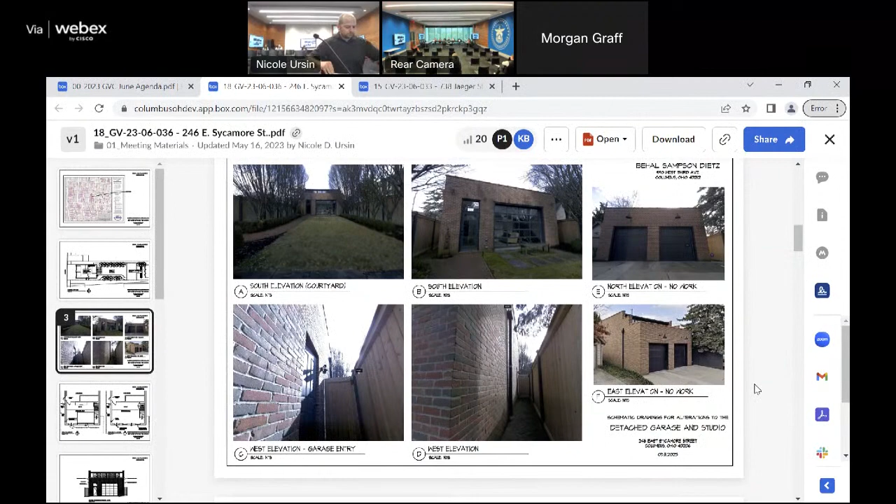The proposed work description is an exterior building alteration to alter garage openings: remove the existing side door and transom on the south elevation and install a Marvin modern outswing door; remove existing overhead door on the south elevation and install a Marvin modern multi-slide door in the existing opening; and add a doggy door to the west elevation towards the southwest corner.

Staff analysis: at the June business meeting, the commission requested the date of construction of the garage; it was approved in 2008 as GV-08-07-012. Staff recommendation is approval, with any and all clarifications submitted to HPO staff prior to issuance of the certificate. The basis for staff recommendation is German Village guidelines for new garages and outbuildings, 1 and 6, and 311612 standards for new construction, A, D, E, F, K, and M.

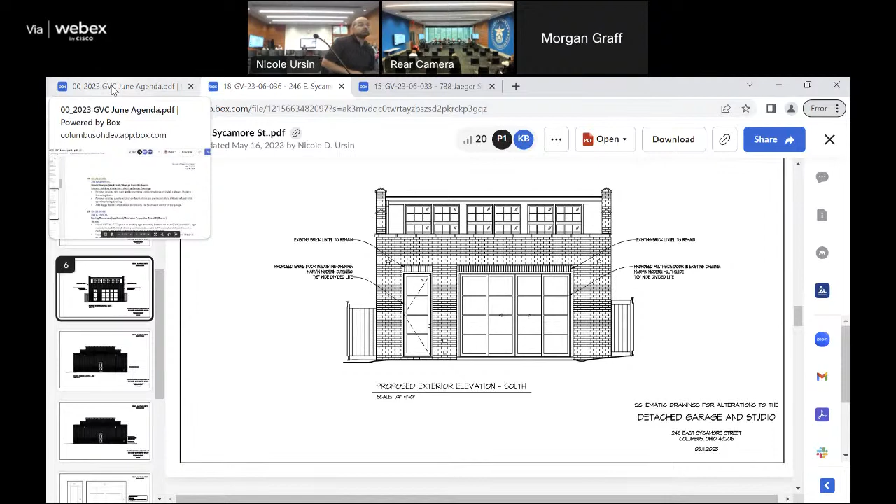No objections or further comments. On item number 18, GV-23-06-036, 246 East Sycamore Street, I move to approve as submitted. Second. Any questions on the motion? All those in favor? Aye. Against? Ayes have it, the motion passes.

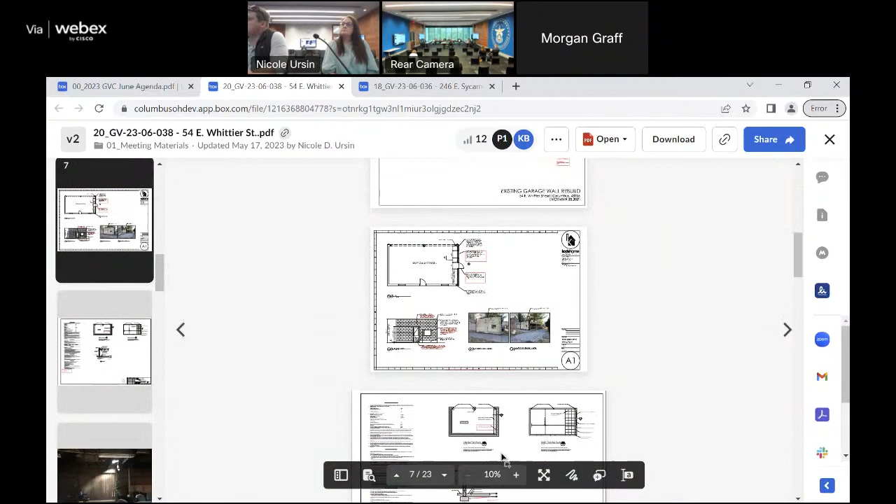The staff recommendation is that the commission offer feedback and continue the application to allow time for the applicant to amend their design to be more in line with German Village guidelines and city code. The basis for the staff recommendation is 3116-11, standards for alteration 1, 3, 5, 9, and 10, and 3116-13, standards for site improvements A, and the German Village guidelines for doors from the 2005 amendments.

Anything else to add? No. Questions, comments from the commission?

This goes back to our previous application where you talked about restoring what was removed historically. I should add some backstory on this entire project. We've had a few employment changes throughout this project. We've also found that the contractor originally brought onto the project was not aware that they needed the commission to be part of the City of Columbus approval process. We have now made him aware, and he is no longer on the project.

We were asking to potentially either keep the cinder block and try to paint it to match similar properties within the same block area. If that is not an acceptable amendment, we have been having severe problems trying to find a stamp to get these two matched. We found one vendor who said he could try to create it for us, but it is a costly creation.

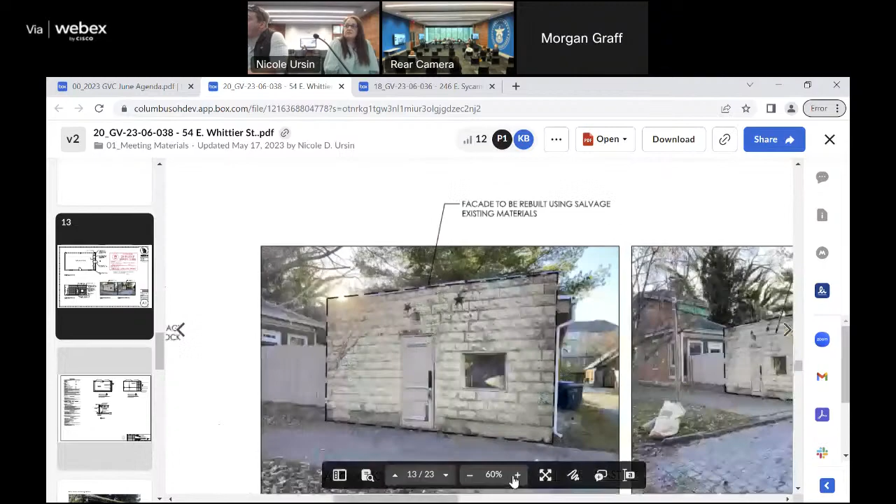So on this piece, if the commission requires that those be restored, we would ask for a recommendation of some kind of facade facing to show it looks like that, but have the interior remain. How would you do that with block? That's hard. You're right, because you'd have to take the block out to do it. Either way, if we have to make any changes, it's going to be a costly change.

So for clarity, you gave the contractor these drawings. Unfortunately, we were not a part of the project at the time. The property manager in 2021 started it, the new property manager in 2022 completed it, and we are now the new set of managers handling the project.

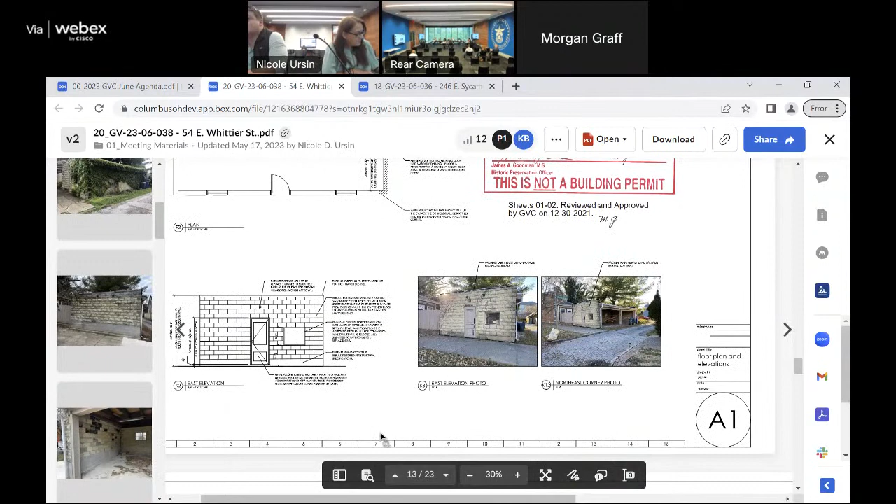That'd be good, yes. And then I think that if we could look at using a door and a window off the approved list at the same location. It looked like those probably just had steel lintels, it looks like maybe on there, so we could go back with it.

The door and window off the approved list, see how many blocks that gets us back. Fill in as many as we can, see where we are.

Do you need the door and windows to be put back in? Yes, that was what was approved. Would we typically be able to do any kind of an amend or change on that? Typically we wouldn't fill in an existing opening.

So I don't know how you guys feel, but approved window, approved door, see how many blocks we can. Not for approved window, approved door - I'm for something that resembles or duplicates what was taken out, as best as possible. No, okay, well it can be made. Yeah, sure can.

I don't know where you're at financially, but I would recommend getting professional services to help solve some of these problems. But we understand it's just going to be more costly, that's all.

I get it. Well, we don't consider cost here. I understand that, I understand where you're going with that. It just - we're between a rock and a hard place on this project.

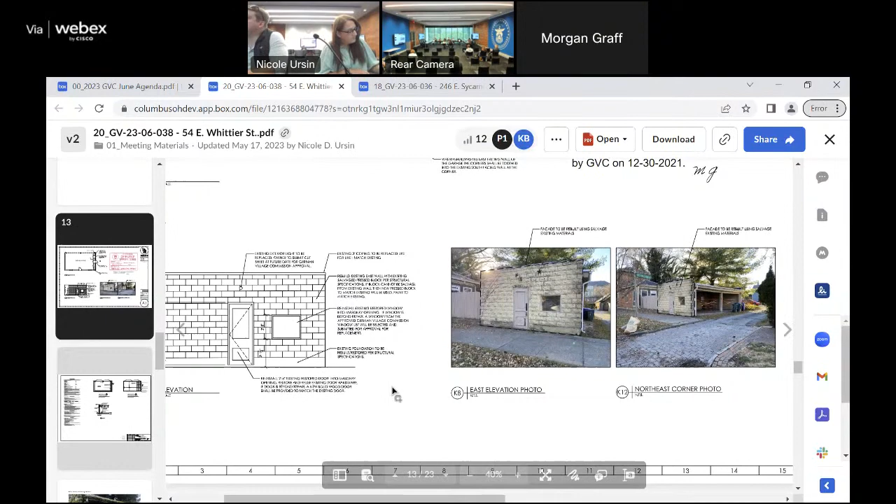And there's a company out there called Classic Rock Face Block. They've got a veneer solution. I'm not sure if that would pass muster with the commission, but they have a surface that you can apply to standard block. Getting that color match is going to be troublesome. So just trying to find some things out there for you. That's another potential option - I think they'd make a full block too, potentially, with that same surface.

Okay, and with the window, the door is obviously very custom, very unique. The window, it's kind of a fixed wood door window. You still want to recreate that?

Yeah, I mean, I don't think that's a matter - millwork and stops and flat glass, simpler. It was not a big deal to begin with, I don't think it was ever operable. That door is interesting.

So I guess my next question would be, if we cannot find the original door, what would be our next steps? I would try to look for a historic door that's appropriate in that style. Architectural salvage is... yeah, that would be my suggestion.

Okay, you might find the original door. Who knows? I'm hoping, I don't know, the person we use, I have a feeling it went into a trash, into a dumpster.

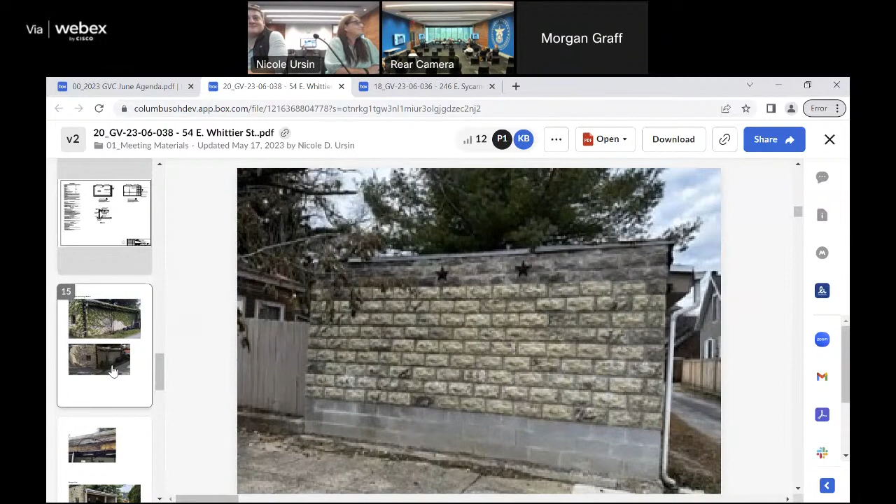So with all that information, I guess to continue the application... yes please, if we could continue. Okay, sure.

Mr. Chairman, item 20, GV 2306-038, I move to continue. Second. Any questions on the motion? All those in favor, aye. Those against? Ayes have it, the motion passes. Thank you very much.

Right, moving ahead to item number 21, GV-23-06-039, 839 South Fifth Street.

If you would please raise your right hands. Other right hand. Oh, you're good. It happens, only my bottle. Just go ahead and tell the truth, the whole truth. All right, your name ma'am? Barry Jones. Steve. Lori Gunzelman.

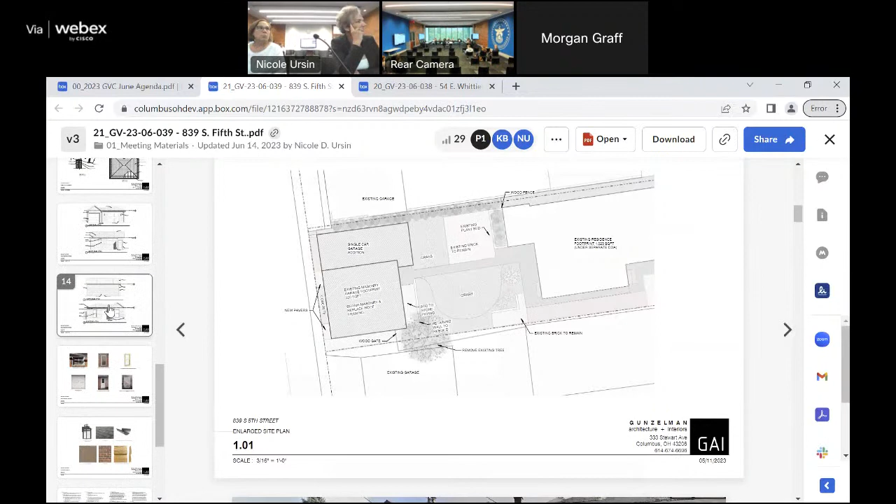Thank you very much. This is a request for action for a new construction and exterior building alteration to a garage: to construct a single-car garage addition that's 10 feet 6 inches wide by 23 feet 10 inches long, and to restore the historic garage. The new garage to have wood trim and milled siding, to remove and replace the wood roof framing on the existing masonry garage, stabilize the existing foundation, install a new asphalt shingle roof with new half-round metal gutters and downspouts, the shingle to be the GAF slate line in weathered slate.

Refinish and repair all existing windows and doors. For one door, remove the existing plywood door and leave the opening to connect structures. Demo existing concrete in front of the garage door and install a new concrete pad. Repair the existing planter retaining wall and tuck point as required. There's also landscaping to remove an existing mature tree and plant a 3-inch caliper Japanese bloodgood maple.

The staff analysis is that at the June business meeting, the commission asked for information on what the previous garage looked like and what size it was. Staff informed the applicant that the shingle shown in the packet was not on the approved shingle list, and the applicant was also asked to provide an arborist report or reason for the tree needing to be removed. The applicant responded that the garage addition to the north was removed prior to the current owner obtaining the property, and the shingles to be used are the GAF slate line in weathered slate.

For the proposed tree removal, the applicant provided that the tree has caused foundation damage to the historic garage. To restore the garage and foundation area, the tree roots will need to be cut, which will inevitably kill the tree. An arborist has been to the site and a report has been provided. The former owner of the house planted the tree, and the owner of the house to the south has agreed for the tree to be removed. The replacement tree will be a 3-inch caliper Japanese bloodgood maple.

Staff recommends approval, with all clarifications submitted to HPO staff for review and approval prior to issuance of the certificate, with the following condition: the applicant should plant a tree to replace the one removed, and the tree type and proposed placement should be submitted to HPO staff for review and approval prior to issuance of the certificate. The basis for staff recommendation is 311611, standards for alteration 1, 2, 3, 4, 5, 6, 11, and 12, standards for site improvements A, and German Village guidelines for garage and outbuildings 1, 2, and 3.

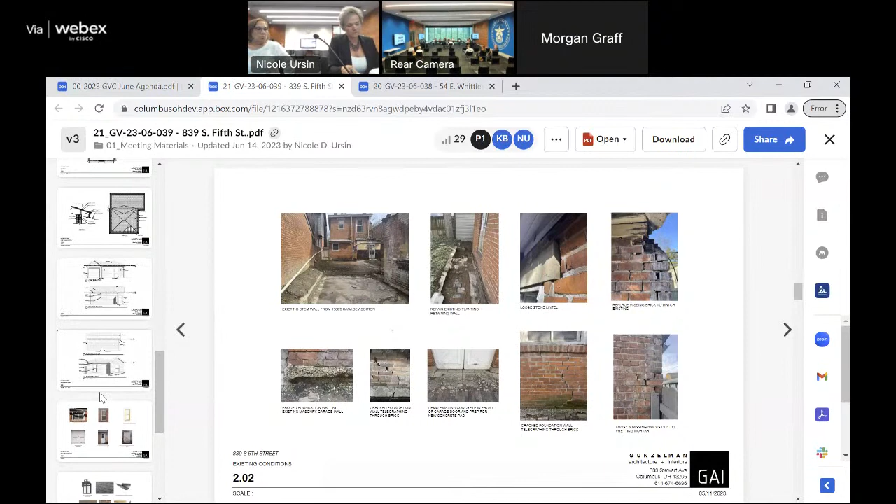I didn't verify it, but I'm not sure the trim dimensions you're calling out are compliant with what the guidelines say. That's like page 83 or something, I can't remember. Do you remember? Garages and outbuildings - yeah, there's a sheet about, well, it's not garage and outbuildings, it's just... who's it, page 80 something?

What's the history of the demolition of the other part of the garage? Was there a COA for that? Yes, there was. It looked like it was in pretty bad shape. No desire to recreate what was there? No. Had to ask. Gotta do something to make it look different, makes sense. Right, but appropriate. So anyhow, there was somewhere in the guidelines a sheet that calls out corner trims, all that kind of stuff.

What kind of set me off was the broadband across the door. Correct, probably does not show up as an acceptable method of treating an overhead door unframed. I guess this is the one - Drawing number 17, page 78 of the guidelines. It doesn't address garage or garage doors, but take a look. You're okay with that? We are happy to modify that. Yeah, take a look.

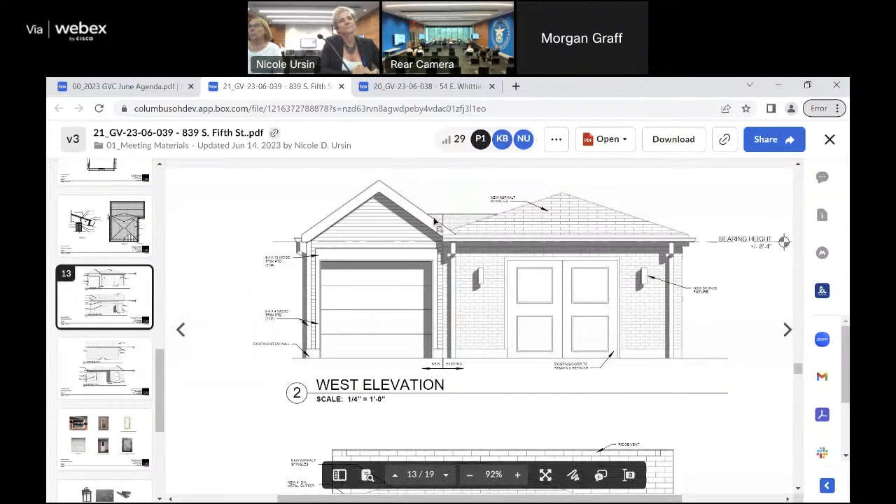The roof framing on the still existing garage, we're replacing all the roof framing. We're going to put back the same pitch and everything. Exactly right.

Looking at the existing rafter tails - are they currently vertical rafter tails or angled rafter tails? Okay, yeah, they are angled. There's barely any roof left, it's kind of hanging onto its last. Hard to tell from the picture, but on the inside it's pretty rough. Yeah, they're angled, okay.

You're gonna need this back so you have your note on, okay. I like that we're keeping it boring. I have to give the owner a lot of credit - she's done a lot of work on this property that's been neglected for a very long time.

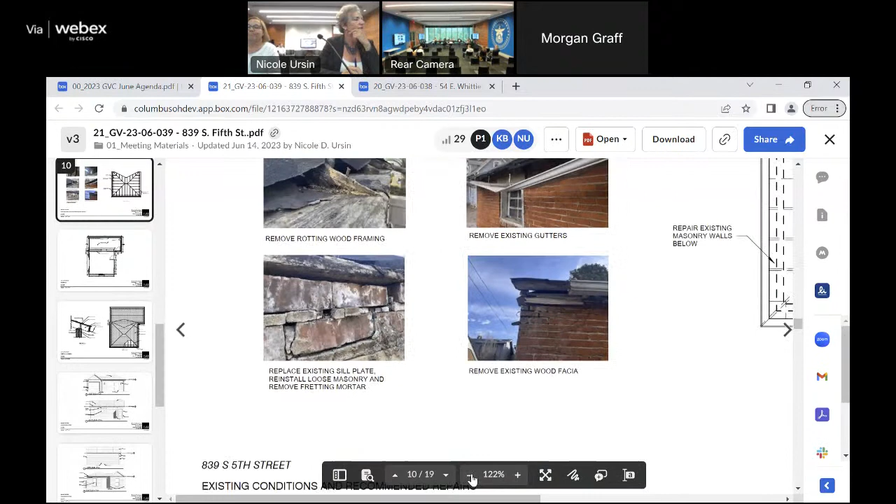So to my comment about the rafter tails on the new addition, I want those rafter tails also cut at an angle for the half rounds. Otherwise the straight vertical will be more of a K-style gutter. Right, right, I'll just make a note of that.

Okay, we'll turn to then - all door, window, light fixture selections all go to staff. Any other questions, comments? There's the comment that it's not a carriage house. Yeah, so noted. No more comments.

Is there a motion? Yes, Mr. Chairman, item 21, GV 2306-039, 839 South Fifth Street. I move to approve as revised, resubmitted drawings.

What else did we say? Oh, trims are going to match the guidelines and be verified by staff and such. Rafter tails at the eave will be perpendicular cut, and also the thing over the door - that's part of the trims. Oh, sign on the tree.

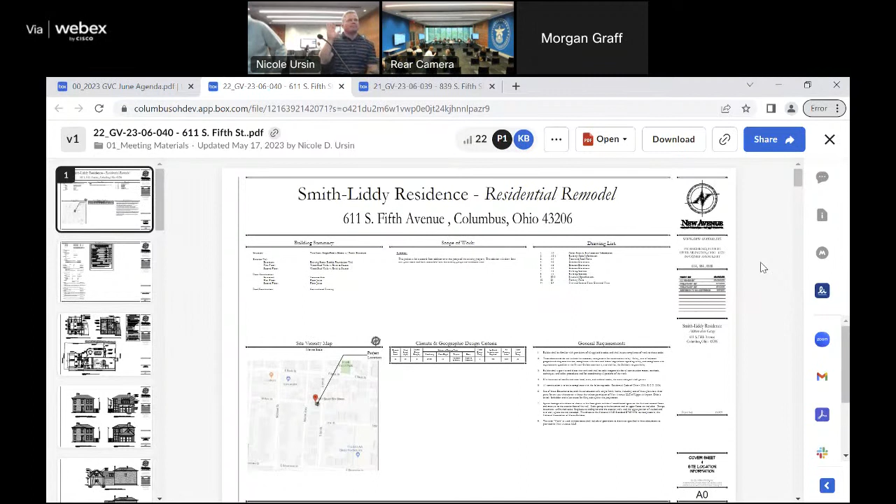If you would, please raise your right hands. You swear to tell the truth, the whole truth, and nothing but the truth? Yes, yes. And please state your name for the record. David Smith. Thank you. Brent Racer.

This is a request for action - an exterior building alteration for a garage addition, to construct a second floor garage addition on the existing two-car garage footprint, install new board and batten siding on the first floor, install a shingle roof on the garage addition to match existing and a metal roof on the dormer, install a new light fixture above the garage door, install a new window on the second floor south elevation, and on the north elevation install a new door and concrete landing on the first floor and a new window on the second floor, install a new skylight per submitted plans, and install slate siding to match existing. The following is taken from the approved December 1st, 2021 GVC minutes.

Commissioner comments: Commissioners inquired how much of the new second floor addition will be visible from South Fifth Street. Applicant responded that it is hardly visible. Commissioners didn't have any issue with the new proposed design of the garage with a lower ridge line and smaller dormer, and agreed that the garage looked improved.

Commissioner Hartke asked if the work can be done without destroying the large trees in the rear of the property. Applicant stated that the lower ridge line helps, but some of the tree limbs will need to be cut back to help preserve them, and the applicant has to speak to the neighbor about preserving the trees.

Staff analysis from the June business meeting noted the commission had no comments or feedback for the applicant. The staff recommendation is approval, with any and all clarifications to be submitted to HPO staff for review and approval prior to issuance of the certificate. The basis for staff recommendation is the standards for alteration 1, 2, 3, 9, 10, 11, and 12.

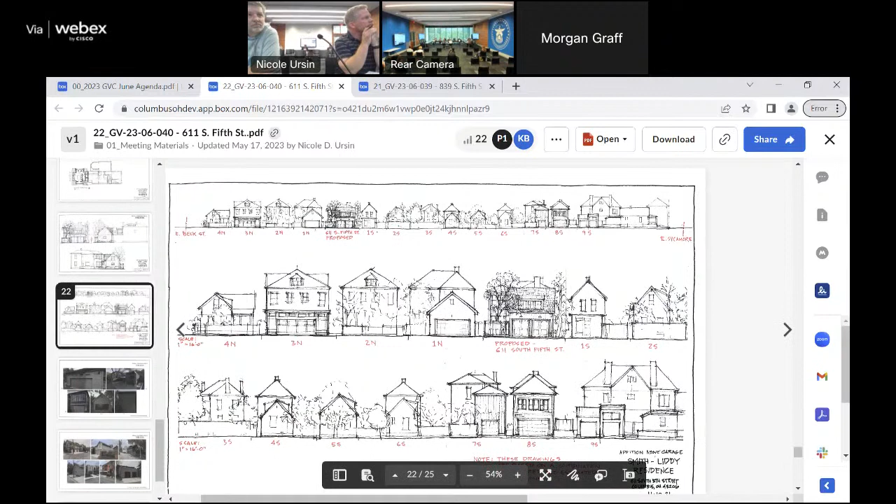As you can imagine, with Macon Alley being there and being shallow, it's almost impossible to get a really... Yeah, but you actually have houses on Macon there, right? Yeah, so you had three north, two north, one north is confirmed. Okay, that's usually okay, so it's within.

Have you done the math to know if it's within the average of those? Typically, we like it to be no more than the average height of those. It's not any taller than the existing ones. The answer is yes. Short answer, no. I mean, obviously the second story of that garage is substantially lower than the house to the north, and lower than the house to the south as well.

So that house is 15, or what house is facing the alley—does that say 14? I can't see it. It's certainly shorter than the average of all houses on the street. But yeah, thinking about the facades facing that, the garages.

Trying to think back to this conceptual review from 2 years ago, I'm usually pretty good about remembering, but this one's escaping me. Trying to make sure I'm not going back on statements I made back then. I know the two main comments we heard were that the dormer be reduced, which it has been, and that the ridge line be pulled, which it also has.

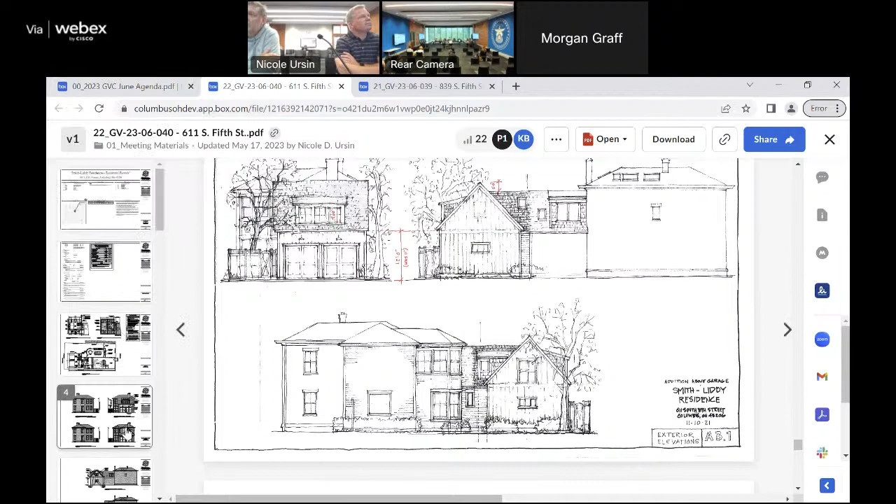It looks like a garage that's not attached from the front or the alley, basically, is what you're getting at, right? Right, you can't really see the attachment from the public way, and that alley elevation was helpful to see that. Any other applications that didn't already have the attached garage there probably wouldn't get the attachment approved. Okay.

It meets the addition requirements—how the walls are longer than existing walls, it's even shorter than the existing house. Yep, that's helpful.

On the board and batten siding, did you call out materials? Didn't dig into that deep. We sent that in - was it wood or? The board and batten, yeah, we would use like a cementitious product, like a HardiePlank.

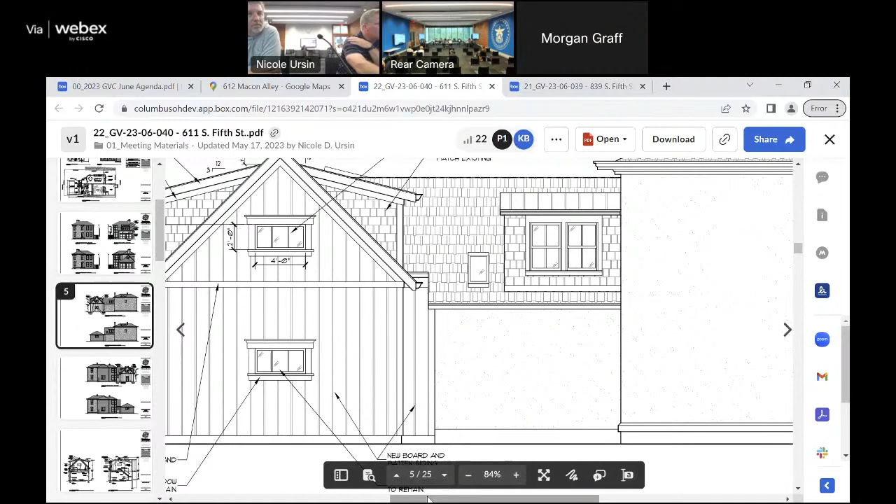I'm looking at the windows on the garage. The trim detail is looking a lot more ornate than what's on the rest of the structure. Typically the garage addition or any addition would have simpler details than the primary structure. It feels heavy architecturally on the garage compared to primary, almost foreign to the site. I know on the other side you had that octagonal-ish addition, so maybe there's something on that side feeding into it.

I think the simpler you can get with the details, it's pretty simple on the rest of the house, so we're certainly open to mimicking that. Correct. Rather than, just making it as simple and clean as possible. Sill, case opening, yeah.

Other than that, I think I'm good. I'm thinking whether the rafters that come down could extend a little further, just to shorten the forehead on the alley elevation. Bring it down a little bit. It just seems like it's tall where the lamps are over the garage doors.

That was part of the thinking of using those gooseneck farm-type lights that are all over the village, to help fill that void. Well, there's a line breaking down because of those. Just a little further, so right now it sticks out 1 foot, so make it 1'6" and further down. Absolutely.

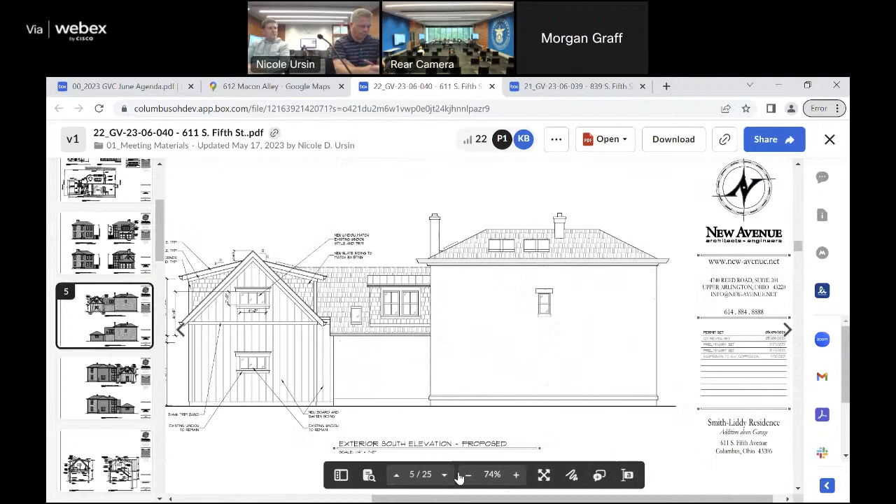Make a motion, if I don't hear anything, to approve item 22, GV-23-06-040, 611 South Fifth Street, with the amendments that we just ran through for staff.

That's the motion. Second. Any questions on the motion? Totally good on those amendments? Yes. All right, any more questions? All those in favor? Aye. Against? Ayes have it, motion passes. Thank you.

Moving ahead to item number 23, GV-23-06-041, 147 Thurman Avenue.

And if you would, please raise your right hands. Please swear to tell the truth, the whole truth, nothing but the truth. I do. Yes. Please state your names for the record. Logan Fitch. Eric Cheryl.

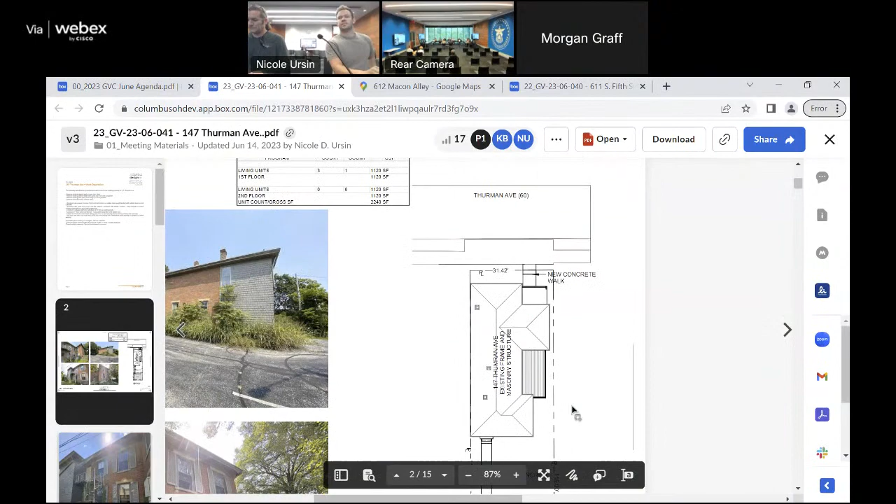This is a request for action. The proposed work description is an exterior building alteration for stairs, porches, and windows: to remove an existing deteriorated wooden front steps on the north elevation, and to construct a new poured concrete front porch and stairs with welded steel guard or handrail with welded steel vertical balusters on the north elevation. To remove the existing deteriorated metal spiral stair on the east elevation, and to remove the existing rear east elevation brick stoop. To construct new wood front porch roof and columns on the east elevation.

To construct and enlarge a side brick patio stoop. To construct a second floor wood roof terrace, composite wood deck over rubber roof on the east elevation. To add a new rear entry door by enlarging one window opening and one small wood stair and landing with cantilevered wood awning with shingles to match existing on the south elevation. And to remove one east elevation window on the rear.

Staff analysis: at the June business meeting, the commission requested more photos of the porch, the date of the spiral stair, and a photo from the right of way showing visibility of the existing spiral stair and Sanborn maps. The applicant provided additional photos, and staff updated some undated older photos, some photos from 1996, and Sanborn maps.

The staff recommendation: the staff recommends that the commission offer feedback and continue the application to allow time for the applicant to provide updated materials and some product information. If the commission does approve the application, staff would recommend the condition be placed that final material selection be submitted to HPO staff for review and approval prior to the certificate.

The basis for the staff recommendation is 3.11.611, standards for alteration 1, 2, 3, 4, 5, 6, 9, 10, 11, and 12, and German Village guidelines for porches and stoops 2, 3, and 4.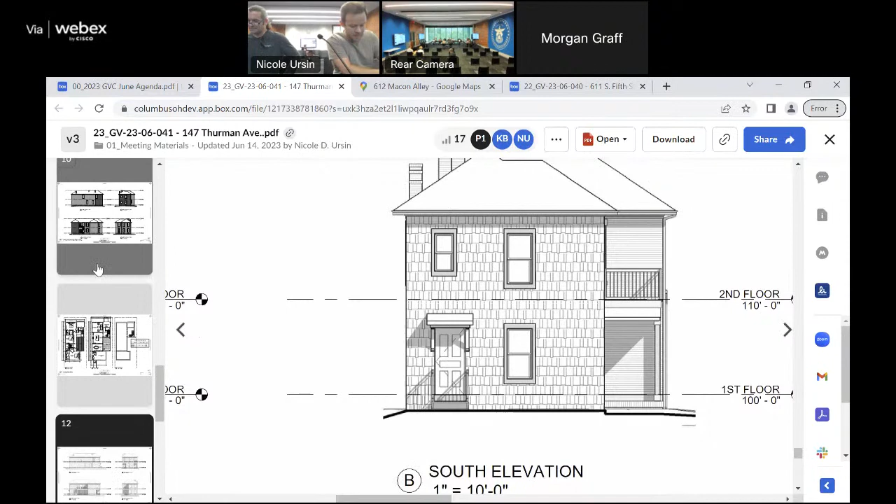On that south elevation proposed door, right now it looks like it's aligned left with the window above as opposed to aligned center. Is there a reason for not having it centered like a typical door would be? Hold on, I'm looking at the plan—could be a drafting error. We wouldn't have an issue either way; we can center that door. It probably conflicts with the coat closet a little bit, so that's probably why it was placed there, in order to get a coat closet behind that door.

I'm not sure that it totally has to be centered, I'm just asking the question. So that would be the reason. I have no objections to anything they're doing in concept, just think some of the detailing needs to be worked on a little better.

Especially with trims and some other stuff, and how the porch relates to the existing corner that it's in. Are you talking about the front porch? Yeah, the front porch. I think it ought to be pulled back a little bit from that east elevation corner.

To provide more distance from the front face of the front building, that corner, yeah, okay, the front porch we're talking about. Yeah, just little stuff like that. I think it just makes it work a little better. You've got it flush right now, I don't think that's best.

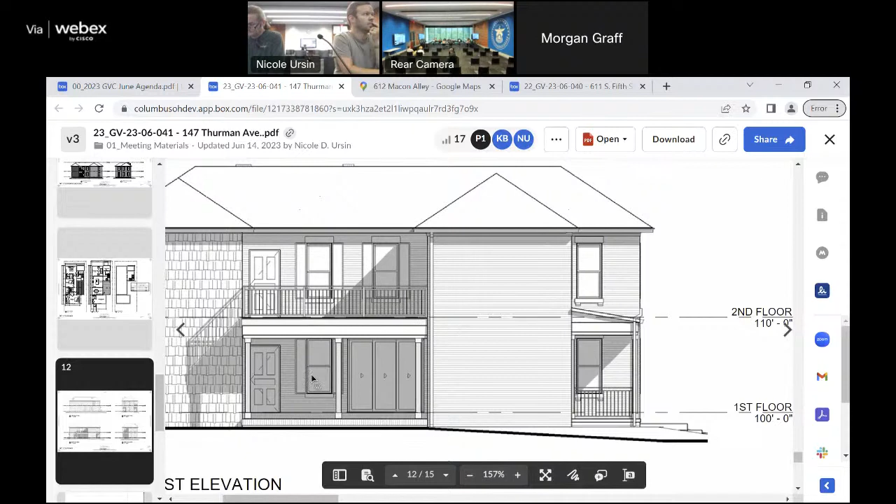Joyce has pointed out, I want to draw attention to the triple slider door. There is an existing opening, it's a window currently I think. Yeah, and it's two windows. Yeah, that's a pretty significant change to the historic structure. I don't think that would be a good idea. I agree.

You understand the concern? Would a scaled down version be more appropriate? Maybe not, we don't, I mean full, that's the historic fenestration. Yeah, and you've already got a door there. Would we, if we kept it to a single, would that be more appropriate in the commission's eyes? You're talking about just keeping the existing opening size. Keep the existing, and then just the door allows some circulation off the kitchen as currently designed. Maybe something less robust, but the location of the door you're trying to get, basically.

I'm hearing you right from a plan standpoint. Correct. Yeah, the relationship of that door - one of those windows could be turned into a single full light swing door. What's nice about that is it's restorable, keeping the existing opening.

I don't know, they're taking out the historic brick material. Well, it's brick there, yeah, that's a whole different story. I think that's gonna be a hard sell. Yeah, the elevations were showing siding, so I was thrown off there. I think there ought to be some discussion also about the railing styles you guys are showing on the second floor porch and the first floor front porch.

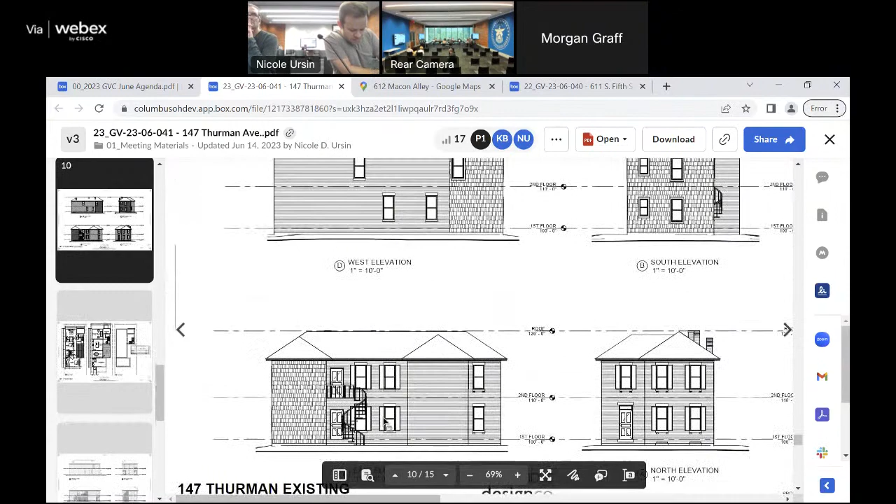Is there a tolerance for brick removal depending on where that floor plate actually lies on that elevation? I mean, you've got an existing stone sill, existing stone lintel - very clear historic. Typically we don't open up the brick wall unless there's evidence of there being a full opening there previously.

There is - Steph was pointing to that, there's a bricked in opening there. Could that be utilized? It could be. That almost looks like it's deeper - I don't see in that photo, I don't see the bottom sill. Yeah, it's a window, or a previous exterior door, because that Bilco door goes right to the basement.

Listen, I'd be out there to take a look and see what's there. Is the brick too thin below where there would have been a sill? Is it a door that got blocked up and then they put a basement door in? A little bit of investigative work there.

Right now it's being restored to a window, it's in the plan it looks like. What was a window, that's being - right now it's leaving it blocked. Okay. The second, it'll hit the - yeah, the jigger.

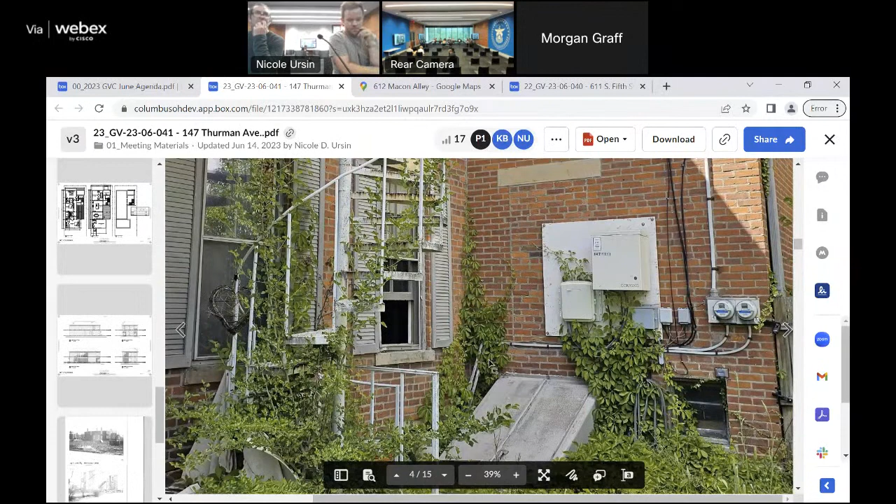So in your folks' mind, that opening that's currently bricked in would potentially be a location where we could put a door. I would think it would be an opening you could restore. I think it depends on it - was it an original window or is it a door? Yeah, which is hard to tell with this, because there's no sill. But there is a line where some of the brick's too thin, some of it's not above, and then it's not too thin below that, where that cable comes down, right?

Well, regardless, it was probably a miss on our end and we'll open that opening regardless, whether it's a window or a door, just to get some more light into the foyer, especially with the existing. Yeah, you can get a window there, put the header in. Definitely a window, potentially a door, depending on what was there. If you could tell what the original window was there, that would be nice.

Going back to Ned's comment about the front porch - the photo on this page, the bottom photo, shows that porch going out to the edge almost. Hard to tell, but it's a helpful photo for the pilaster setback. It's a flat roof porch.

Is that photo better in person than what's scanned here? Yes, might be good to try to get it better, something closer to that. Your columns are a little smaller, you've got slope - it looks like that's flat, or at least maybe sloped. We had a pitched front porch cover, so we can use that photo.

It certainly seems like it's got a piece that's in front of the front plane of the building - it sticks out. If you go back to what that is, that gives you the path to do that. If you're not going back to what was there, it needs to be more like a new porch approach. I think we probably chase trying to restore it to that. I love the thickness of those columns - nice, that almost looks like an entry vestibule.

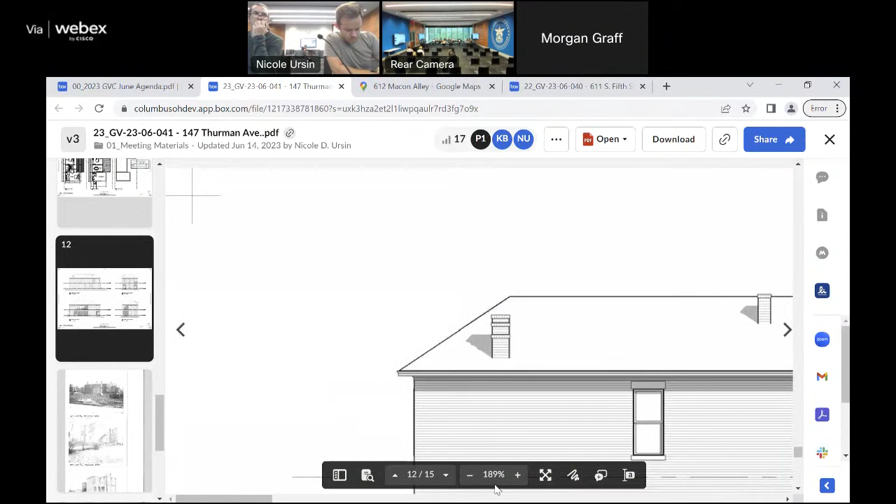In terms of the porch railing, question for the commission - typically we go simpler on the railings, a lot of times it's just a single horizontal pipe. Are we looking for picket rails on that one side of the porch as shown, the front porch? It may be high enough that a fall condition requires a guardrail - it may be required, or maybe not, now it's like it's below 30. But the question is are we looking for more traditional pipe rail, barring evidence of something more ornate in the past? Pictures cut off, which is interesting.

I think it's up to them. I feel like you're probably trying to tie the two together a little bit, which we don't - yeah, just from that elevation we'll match them. We can put something together. Cool.

And then, not shown, was a miss on our end - this is, per the new zoning plan, gonna get a two-car garage.

Nothing crazy, just a standard two-car garage. Is there a standard roof pitch, sconce lighting that is most appropriate? We're not gonna reinvent the wheel or push the envelope on the garage. It's gonna be standard, I think lap siding, the guidelines would probably have. There's actually a garage in the guidelines, our garage. Is that staff approval if it matches?

Probably not, but okay, she's shaking her head. I'm sure if you copy that, you're probably golden. Okay, garage, not a carriage house. It's on page, correct, I remember that meeting a while ago. So this is a standard one-car garage detailed out on page 116 of the guidelines, under the new construction for garages. I'd say go there, take your cues from there.

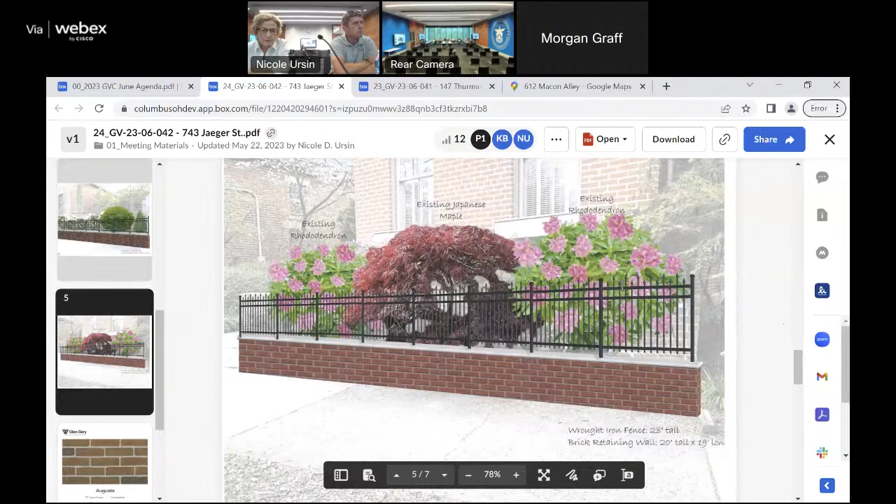The existing wall does not have a stone cap, it has a roll lock. Is the intent to go back with a roll lock? Yes, with the roll lock, our software just could not depict it. Got it, we needed some sort of cap, I figured.

Same question with the fence style. Correct, that style, no spears, it would just match the other. Yes. Got it. You're reusing some of the existing fence, right?

Yeah, we plan on using it all. So basically you'd just be taking the piers off. The reason for those piers is right there, I can make that work.

I can cut back the lilac without killing it, or tie it up. On the right side, there's no way I can save that Japanese maple and those two rhododendron, that would have to come out. I can't work around it, there's a pillar or pier right in the middle of that.

Rhododendron is the state flower of West Virginia. It is, yeah, one of my favorites. And they're two gorgeous ones. Yeah, and that Japanese maple's been there forever. Long time.

Basically, this is replacing in kind without the brick piers. Yeah.

Typically we wouldn't actually allow a fence on a wall down, right? Well, this is also a case of it's a retaining wall. Yeah, it is. It's still under height. I'm okay with the option myself. Makes sense, I'd like to save those beautiful plants as well.

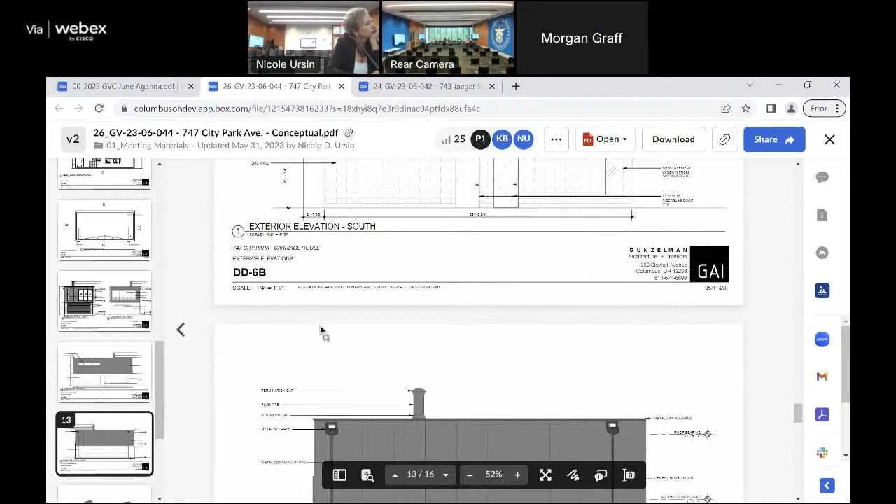And other details including a flue pipe, vent trellis, and balcony with black metal with horizontal cables.

Staff analysis notes that the commission has reviewed a submission for a carriage house at 747 City Park in the past, GV 22-12-035. But this application is conceptual and includes major changes from the previously discussed design.

At the June business meeting, the commission had no comments or feedback for the applicant at that time. Staff recommendation is that staff recommends the commission offer design feedback that can be utilized by the applicant to further refine their proposal for review at a future GVC meeting.

The basis for staff recommendation, noting there is no action required, is 311612, Standards for New Construction, CDF and K, and German Village Guidelines for New Buildings, Garages, and Outbuildings, 191113.

Anything else to add?

Most of you probably saw a previous version of this additional dwelling unit. The owners had sat with that idea for a while and decided that it was not the direction they wanted to go in, so we revised it based on their comments.

I will say that the second level is non-inhabitable. It is a wet bar floor plan. The owners wish to use it as an additional working area. I think that's all I have to say.

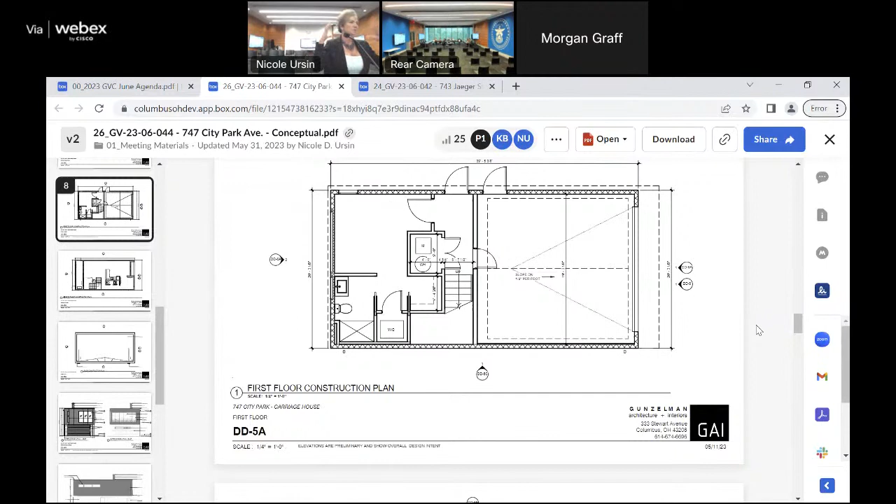One of the challenges we're having is to get the head height on the second level. We're really having a hard time to be below the bungalow that's the house on the front of the property. The owners did look at possibly doing a lot split. We talked them out of doing that, and have come up with this design solution for them.

There is a full bath on the first level. It looks like there's a full kitchen on the second floor. Say again? It looks like there's a full kitchen, there's a refrigerator.

It's just a countertop because there's really no place for it otherwise, they're having a work study there. They'll have some lounge living area. There's no kitchen, there's no stove, I should say. There's a refrigerator, there is a sink, there is no stove.

I think typically we've said no sink, right? Yeah, that's typical. No sink. I will say that the way the city has been interpreting code, it kind of negates anything there, because now they call it a dwelling in the code regardless, so it doesn't matter. It's truly a dwelling.

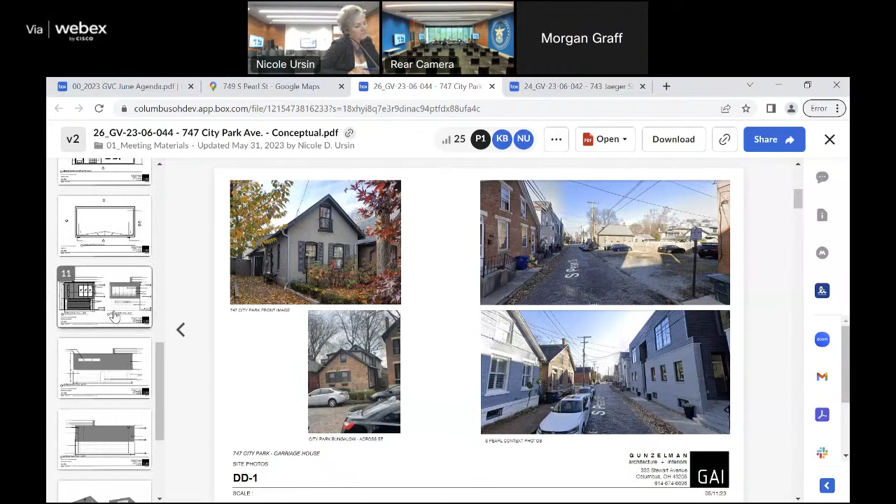For new construction, there are three things we look at: massing, materials, and detailing. Typically, what the guidelines say is to vary one, mostly to make sure it's compatible but different. In some instances it's okay to vary two. I'd say you're probably leaning towards varying all three. The massing—while the height is good, it's not a pitched roof, it's a flat roof—and all those things are the challenges we'll have to walk through to see if this would even be approvable.

So that's just to lay the land a little bit on how the guidelines look at new buildings. I said exactly what I was gonna say—it feels like all three are being altered.

Yeah, it's the narrow lot, as we stated before—basically dropping a block on that lot is what's happening here. There is some architectural language from the prior application to the south, of rectilinear, but not full two-floor rectilinear. To the north, there's not the architectural language to speak to this. Across the street is outside the bounds of the village, so there's differing opinions on how much weight we give to that. But I think that's kind of what you're competing with, or trying to fit into, in that space.

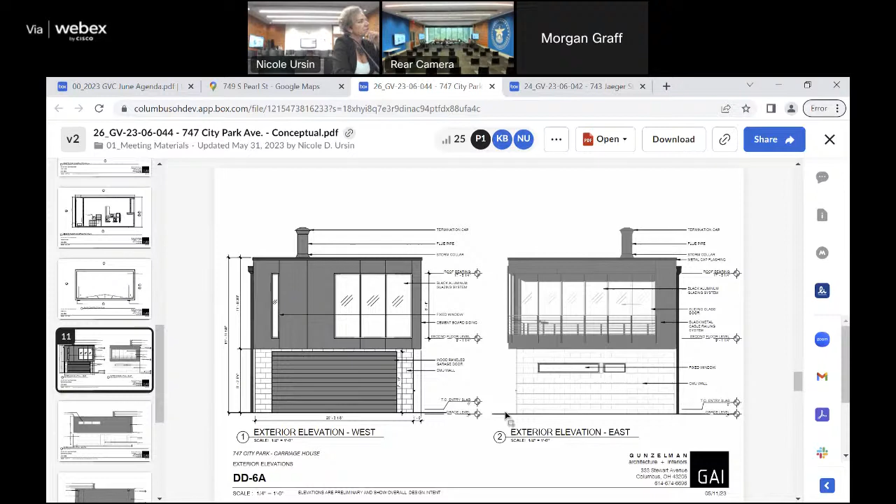I think these straight-on renderings or elevations are a little challenging. If you go to the 3D view of the front, for example, we are recessing that back to give it some depth on the front elevation. Again, it's a little challenging to try and get.

This idea of a porch or a living area off the street—we're not going to get it because we have a big garage door there. So taking that design idea of a living space on the front of a building that people use as a porch, instead we use it as sort of an inset here. We're taking a traditional idea of design and trying to reinterpret it into what we can do on the project. Again, if I do the gable, I'm losing so much square footage on the inside—I basically have a narrow line down the center with very little livable space. It almost makes it impractical to do the project.

I'm just thinking it through and trying to find a path for this. That thing you started to talk about, how that inset is perhaps pulled from historical context—providing historical pictures of those types of things, and maybe even starting to pull and think about how you're providing modern takes on traditional details, could be something that starts to get us there.

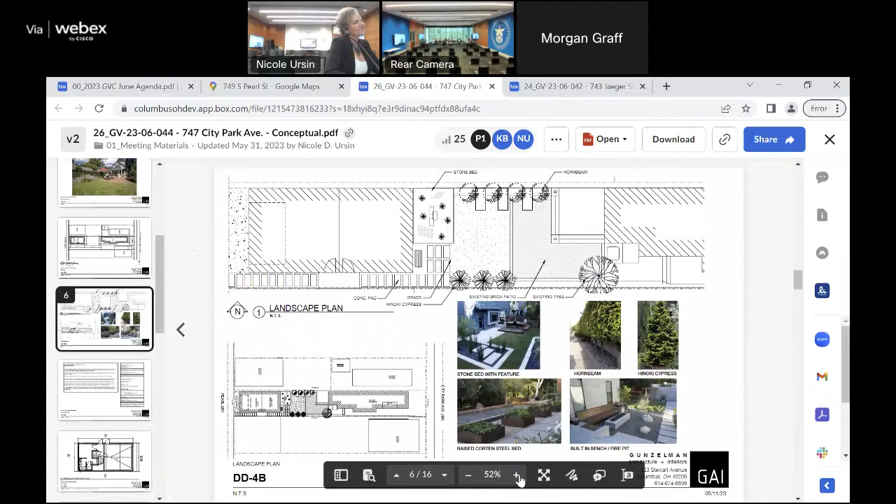Karen, does it help that some of these lots aren't full depth, with structures on both sides just down the street? Does that help it from a concept standpoint? Yeah, and I don't think if you did an actual lot split it would be better—you'd make it worse. Exactly, it'd be worse. But all those existing ones that are split, typically...

What has been the case in the past, when someone was trying to enter into that development ratio, they were providing additional parking spaces in a garage structure or something of that sort, and it was always justified because you're taking cars off the street. So this is the opposite situation, where you're bringing more potential cars in and removing the parking.

You get the other neighbor to open that big lot for parking arrangements—some kind of parcel we should consider. That would go a long way, say they've got at least 6 or 7 spaces there. I mean, there are deficits. We have had applications where those kinds of things have been done to provide access or parking, or for restaurants. Might have done that a few times myself, but never on a residential project.